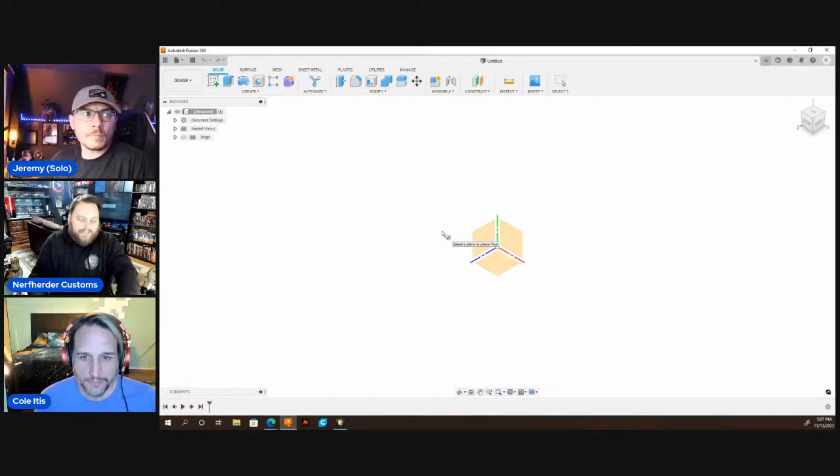This is what I've got done so far. Yeah, I decided I was going to do that too, so that way people can see the start from zero. Which plane do you grab? Do you jump on first? I missed it. I started grabbing a different one. Oh, this one, yours looks different. Yours looks totally different than mine.

Nice thing about these 2.0s too, there's a ton of room. Yeah dude, the thing with the 2.0s is that they're about as big as a 3-cell for the most part, right? I mean, you could essentially probably fit a 31 millimeter speaker in there, I would think. Yeah, you could. I got 1.29 inches for the diameter here that I feel comfortable working with.

That they can sound so good, and people would be like, 'Oh, what kind of speaker's in there?' And I'm like, 'Dude, just a fully enclosed 28. You're good to go, man.' That's it.

One thing I started to do that was messing me up, Jeremy, was I started forgetting to start with the battery first. Like I was saying with that other guy, go with the battery first, man. I think that's probably the number one thing you'll have a problem with is the battery. So if you don't design your battery or chassis to the right diameter of your hilt, when you go to clash, the battery can knock loose and it'll just reboot your board. It's super annoying and awful, plus it'll be rattling. So the number one most important thing when doing chassis is make sure your battery and everything hug the wall when it goes in.

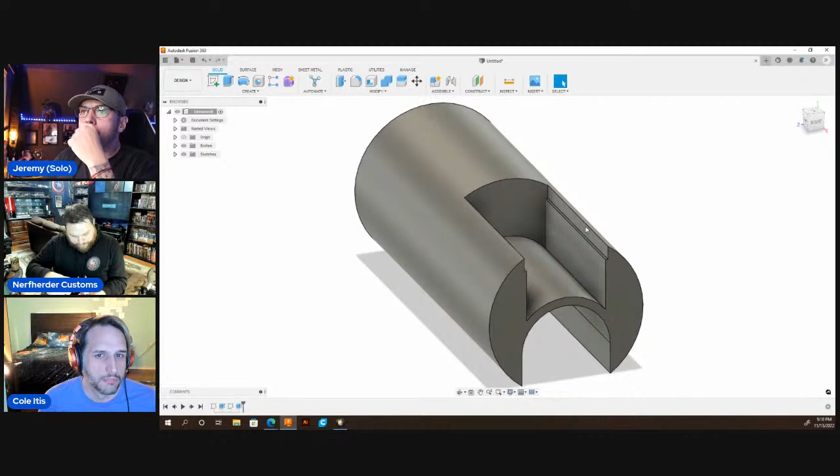Yeah, so I got 33.1 millimeters on the diameter. I don't know what that means, let me switch it to inches, bro. 1.3 inches. Does that sound about right to you? Yeah, that's what I got, 1.29. Okay, yeah, I tend to grab the calipers and pull them a little. I'm just going to go with 33 millimeters.

Hey, one thing I got real quick at doing is battery tabs, or like batteries.

Oh, I need to have that on. Oh.

Actually, might switch. I got you guys up on another monitor. I never use this one. Yeah, we're switching, I'm making you guys smaller. I can't see this. I'm using a trackpad, for a Mac.

Yeah, I don't think that's a good idea. Wait, what are you using? A trackpad instead of a mouse. Oh yeah, and it's the weird little way you have to finger it. Oh, awkward. A little frustrating, yeah, the mouse. I couldn't do it.

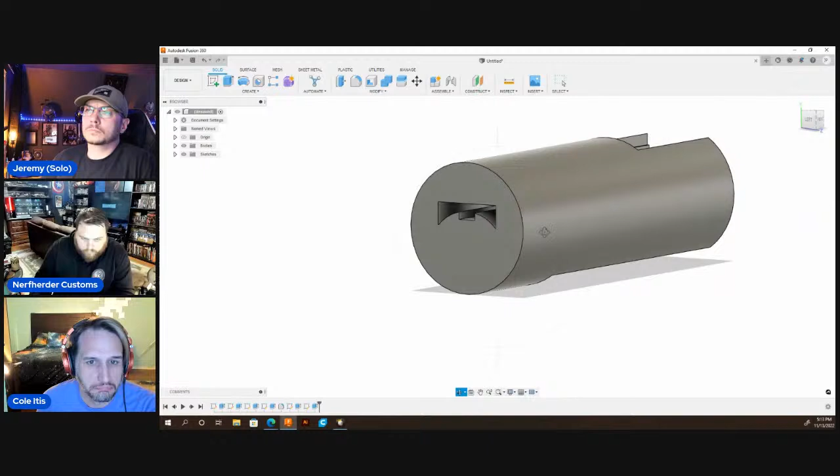One thing I like about this big of a chassis is that it gives me more room to play on the depth of my greebly inlays. If it's thick enough of a chassis, I can make those seat in further, so the dimensions of the greeblies I put on will be a lot more prominent. With smaller sabers with thinner inner diameters, it's really hard to do that greebly stuff because you'll end up protruding into the actual component areas. So whenever there's a thick bit of room to play with, that's where it's fun for me because I can really dive deep. You can dive in. Yeah, that's for sure.

I'll see some sabers and think, oh, the chassis would be really fun to play with that one. And then I'll look at other ones and be like, oh, that's a challenge, but can't make it work.

Cole, have you gotten used to the navigating of it? I think that was the hardest part for me, was finding out how to move stuff, you know what I mean? I ran into so many problems, I'm like, why can't I pull this piece?

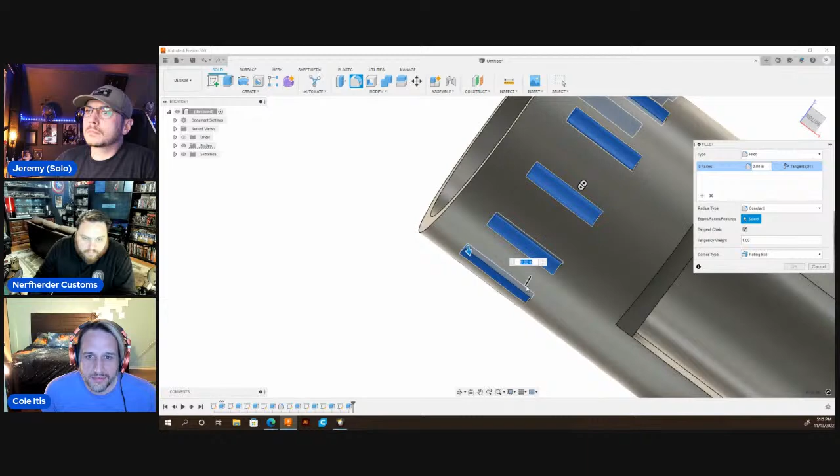You hear me, Cole? If you're busy, Cole, that's good, dude. Oh sorry, I missed you. I was saying, have you gotten used to navigating Fusion 360? That was kind of the hardest part for me, figuring out things like grabbing stuff and moving. For the most part, it's the rotating around I'm still not great at.

Okay, that's the drawing. So one thing I didn't realize till later on was I could use, if you have a mouse with a ball you roll, or if you press in, you can grab things and kind of rotate them.

So what I started to do was whenever I click certain things to extrude and whatnot, I'll click one item and hit Q for my extrude button. Then instead of shift-clicking to select everything, I'll click other items and it'll let you just hit one and select everything you want. Then when I push in the bar or the roll ball, you'll grab the whole item to move it on your own, and when you let go you'll be good. That's the one thing I used to lose a bunch of highlighted stuff trying to get out of orbit mode. It's just weird things you figure out by accident, really.

Jeremy's already got a whole chassis already designed. Cool.

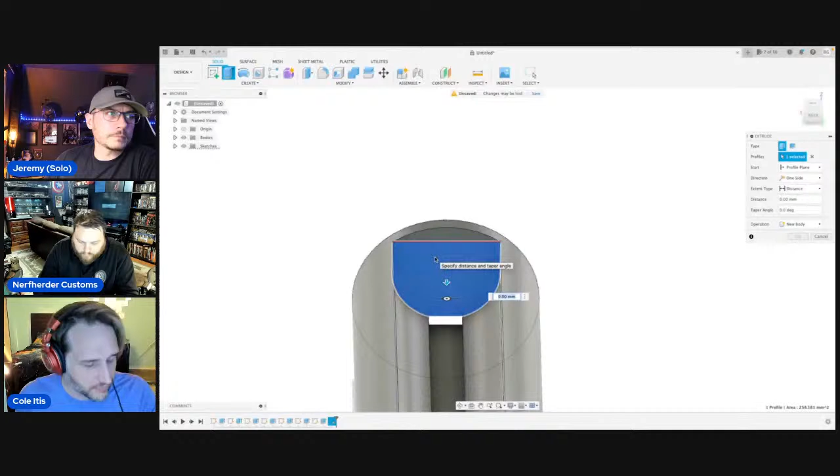Okay, let's see here. I'm still on the battery compartment of mine for anybody just chiming in. I finished up the diameter for the chassis and the battery and wire channel, and now I'm doing the solder and the speaker tabs. Got one.

All right, so there we go—there's my basic battery that'll fit in the 2.0. Then I'll do my soundboard right up top here, and then I'm going to go ahead and do the speaker right here.

Speaker, what's it, 33? I usually do like Jeremy does, where I do every part at 0.1 inch, giving myself a little room to work with before I get to that component. So yeah, I'd pull it out to right there and then start my speaker, same for probably down here. That just gives everything a really good bumper between components and the wall of the chassis or the next speaker or whatever.

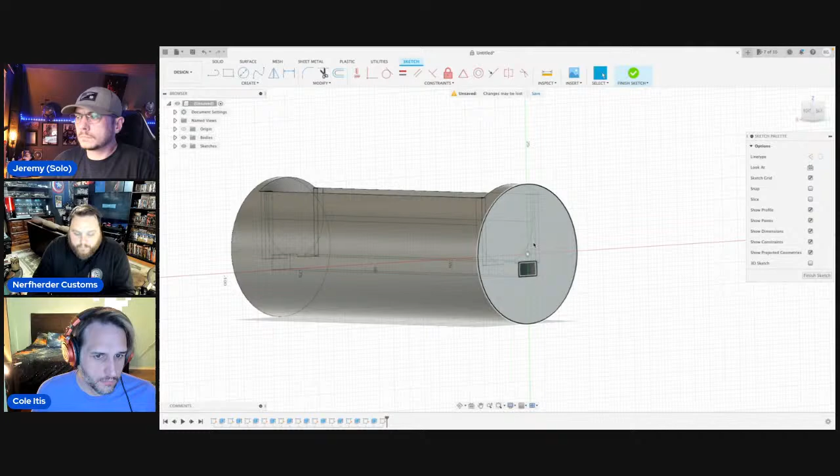Also, I do that mainly because whenever I change up a lot of stuff for greeblies or whatever I'm doing to the chassis, if I didn't create a new plane for this right here and I accidentally extruded it wrong, you could end up messing up everything behind it. So by creating this new plane, extruding it 0.1 inch, and starting my new area, that makes it so if I make any mistakes, I can come back to here. It's kind of like a checkpoint in a video game, really, when you look at it. But thanks for coming to my TED Talk.

We're done, I'm done, I'm done. So there we go, now I'm gonna go—this is one thing I started doing too. What's my diameter for... it's like 2340, I think, for a speaker.

Yeah, I started to just do this, man—I used to go kind of crazy with it. Let's say 2350. Negative at least 9. Enough room? Oh yeah, we can do more than that. Let's do negative 11, why not? Screw it. So then from there, that's the inside of the speaker, like with the side pieces—that's what dips in because I'm recessing this speaker completely. I've got more than enough room.

So now I'm going to do 28 for the speaker, and Q this guy to negative—was it 1.6, I think? Is that right? I always forget if it's close to that—no, 2, that's right, it's like 2.

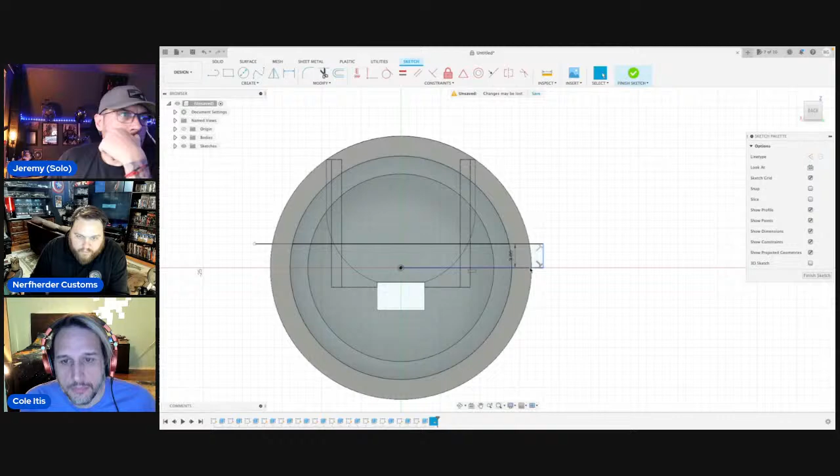This is another cool thing, I don't know if you noticed this, Cole. I want to go all the way across and make sure it all lines up well. If it doesn't, I'll usually go to this guy and it'll kind of draw out like, oh, you want to go there, and I go, yeah. So now it'll always lock me in. If I go here, it'll go, okay, you're locked to that distance now, so I can pull it and just let it hit all the way. See, it kind of locks in.

So every time I was trying to do that yesterday, it was making like a half circle. I was like, what the? What are you doing? I think you're holding the key down too much or something. There's a way where you can grab it - if you're grabbing it and holding onto it, it'll bend your angle, and that's not what I want at all. All right, so solder tabs are, let's just say -9.

Look at that, boom. So that's what I've been doing for my speakers, man, to be honest with you, because you're never gonna see it. So it's like just get it in and make sure it's functional. And then why not? Actually, you know what, I'm not gonna do that. I like to do the other one on top.

So yeah, that is basically it. Now I just need to get the soundboard.

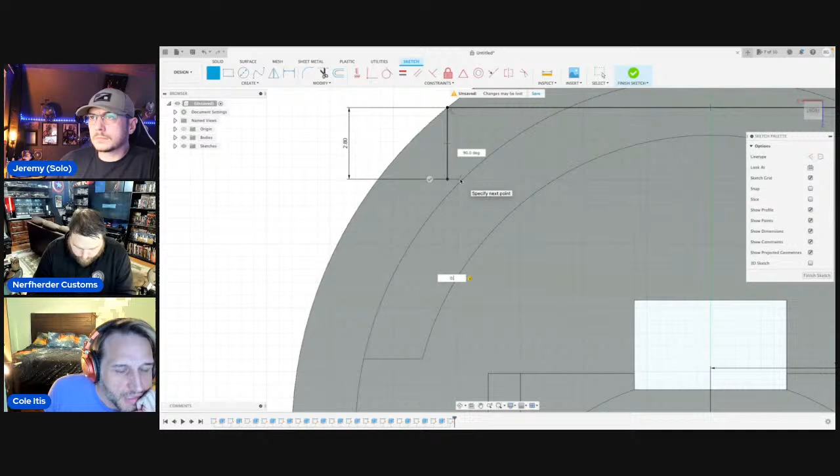That's right, you working on your chassis, Cole? Yeah, I'm trying to make a hole. Oh, right on. Center angle.

What the - just hell, let's see what that does. I'll hit the back button. Oh, that's pretty. Made a little hole in the back end. That's weird. That's what she said. Hmm, oh, it made like a cone. That's fun.

Okay, so I can just whirl around and do it again on the back side. Bam.

Any hole is the goal. Sir Peanut Butter, what does he say? Any hole is a goal. 80 holes a goal, oh my god. I love you, Sir Peanut Butter.

All right, so what I was saying, Cole, is I'm gonna extrude two different areas. All I'm gonna do is click that one area, then hit Q, and it brings me here, and I go, I also want that area. So I don't have to hold everything - it'll just, and you can keep going. I want that area too, but that's not what I want. So what I do is just hit that, what I'm getting to extrude, Q, and give me that also. So that's one thing I found out on accident, and I was like, oh, that's nice.

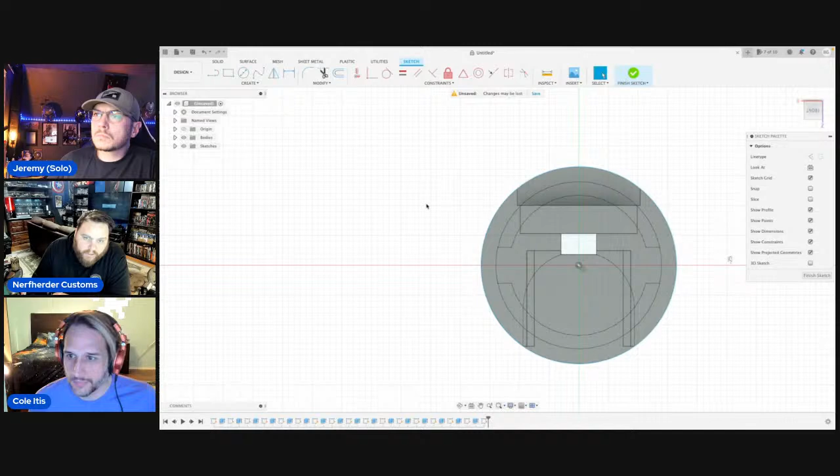Oh hey, this is also a tool that I use a lot. I don't know if anybody else really does, but I want to make an arc. I use this a lot for my greeblies and everything. So I'm gonna draw on here. I'm gonna hit L for line, come up here to create, go to arc, and then go to 3-point arc. This is one of my favorites.

This is my Kobe. Here we go. So let's just go, Kobe, my Kobe dude. I'm gonna go from right here. So I click there, and then I click there, and now I can create an arc wherever I want, just right here.

So that brings me to... I'm gonna go there, that's good enough. And then what I'm gonna do is hit that, Q, that, and then bring that guy out 0.1 inch. Boom, see that though? That 3-point arc thing, my Kobe key, so good.

I love it, so I shout Kobe every time I do it. Kobe! All right, there we go. There's the basic layout for mine. All I got to do now is...

This changes diameter into the Graflex core. So I think we're going to go to 26, 26.10, to make it snug maybe. Yeah, let's do that.

Circle, 10. Boom, baby.

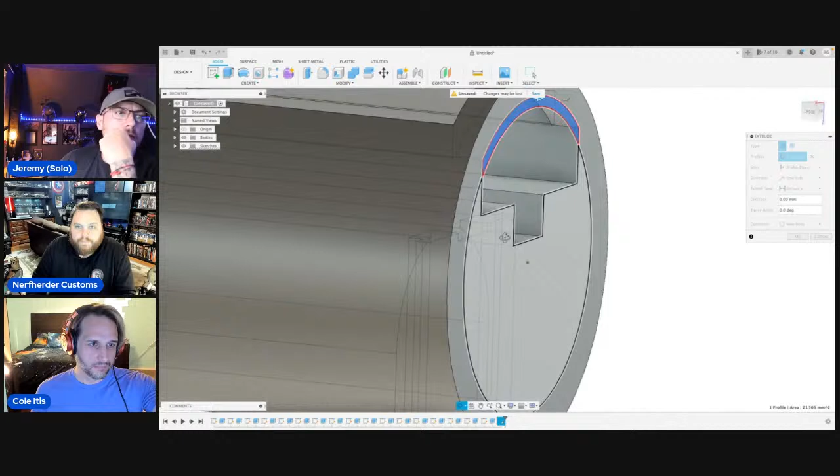Now I'm going to go ahead and build this guy out. Look at that, you see that? That's what's awesome about that Kobe tool. So now I can, otherwise I would have had a gap. So now I'm just going to go there. Boom, now that's solid for my wire channel.

And I can do the right size from that. So what did I say? 26.10. Yeah, boom. That's still probably not going to be enough. Oh well.

I see what I need to do. Okay, oh look, oh look.

What's up, this? What's up? Goofy ass bitches, who let him in dude? Who let him in, what are y'all doing? Making chassis? Making some chassis. Chassis, bro, hell yeah.

All right, there we go. Now we're talking, now we're cooking. And I think it goes in.

Speaker pods? No, this is to go into the core of the 2.0. Speakers down there.

Let's see, damn, how far in? How far in is that?

Oh, you on Facebook too? What's up man? Yeah, that's cool. You could do that on here.

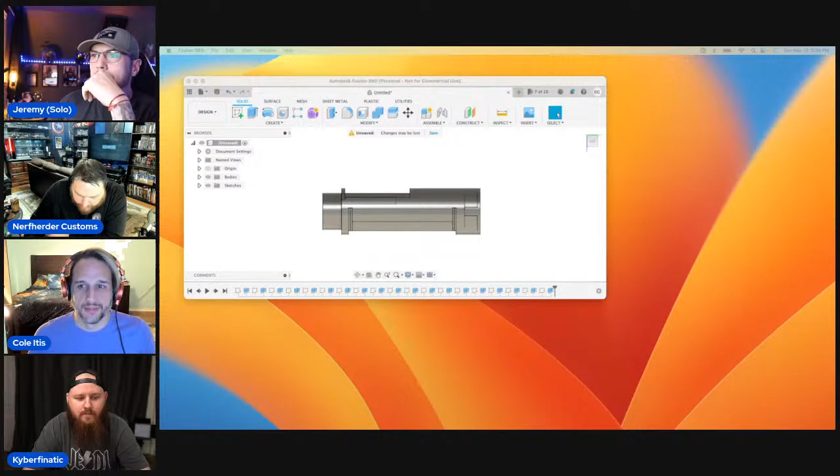Damn, I lost my... there we go, sorry. I'm gonna be working on my greeblies now, so I'm gonna be insetting all that shit and doing how I do it. Doing some simple shit, doing my simple shit.

Carter did, straight up, Carter, I showed that. Carter said, oh dude, cool, looks simple. I was like, dude, you know what man? He said, I like it, simple and effective, and I was like, simple, hours and hours of work dude, it's so long. It looks all right, it's a passive, it looks all right. I'm glad you like it, and that's your thing. You know, I gotta change my preferences, it's not my thing, but because you like it, I like that. I'm happy that you like it.

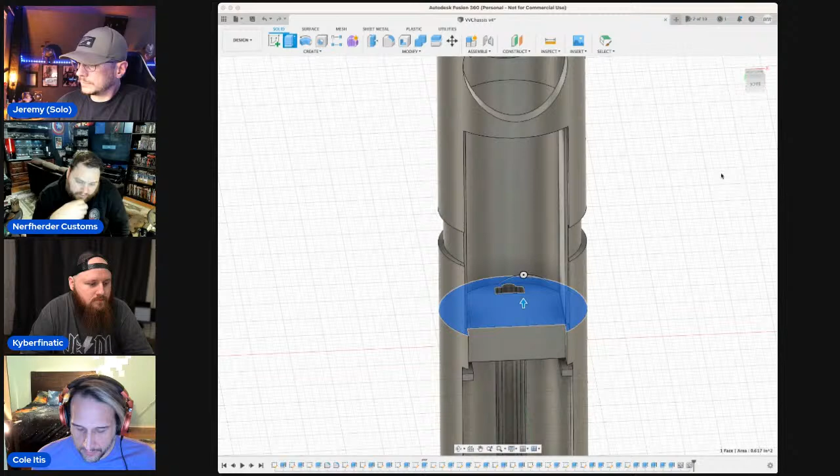So pull it and see what it does. Yeah, see, it's like if it goes red, that means it's cutting into it. So it's cutting as it goes down.

Hit enter, let me see what it does, because you might be able to just pull everything down from there. Yeah, now...

Can you merge? Is there like a split body? So how do you combine? I've never done anything like that. Get everything.

Dude, if I were you, you could just extrude everything down. So hey, hold on, do this. This is what I would do in this instance. Find out however far it is distance-wise that you're extruding down, and extrude everything above it down that same amount. So, like, let's say you need to move that one part down 0.2 millimeters, right? Then everything above it, move that down 0.2 millimeters also, so it matches what it goes down.

Oh no, this is actually a tricky thing. This is what I mean by, like, it's hard to - once you find out how to navigate, you're good, but it's definitely hard.

You can orbit to see the soundboard side of the gap, extrude the object down. Yeah, that's what I was thinking too. But it might just pull that part down.

See, if you click on underneath on the other one, rotate it so I can see the underside. Now zoom in and click on one of those surfaces, not that one, but the actual - this is so hard to explain.

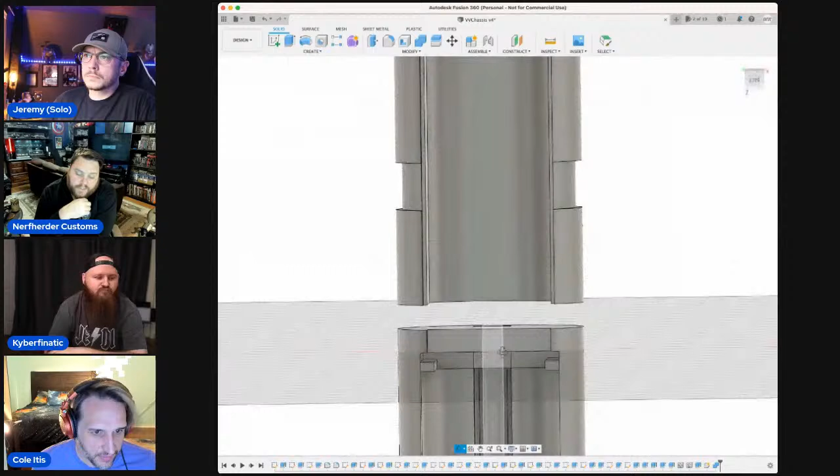Seems like there should just be some kind of function for this. I'm sure there is. The thing is it's two different planes now.

Personally, I would just delete and start over. Like just delete that top part and do it all over again. Might just be faster to do it that way. Yeah, because if I can do a battery compartment in like a couple minutes, I'd rather just do that and make sure it's good.

But I mean, there should be a button. I just don't know it, Cole. I've never had to do that before. You can do it in Mesh Mixer if you exported it out to a slicer program, but you don't want to do that because you're still probably building on it.

Oh wait. Whoa. Yeah, Brian, that's what I think he's trying to do. He made one part a little too long. He did exactly what Cole did. Yeah, see, that's what I'm saying.

I would just - it looks like I would do the battery compartment because that's probably a little quicker, right? I don't know, it's up to you, Cole. It's your Z.

Oh, you did? That was too far. Move, copy - but I don't remember what I took out now because I'm an idiot. No, dude, you're doing something weird. 1, 3. Boom, now hit enter.

Okay, there you go, boom. Make sure it's all good. Click on the lines to see your measurements. Make sure the board and everything is the right length, you know what I mean? It looks right though. You want to go to the combine tool up top too and make that all one object. Okay.

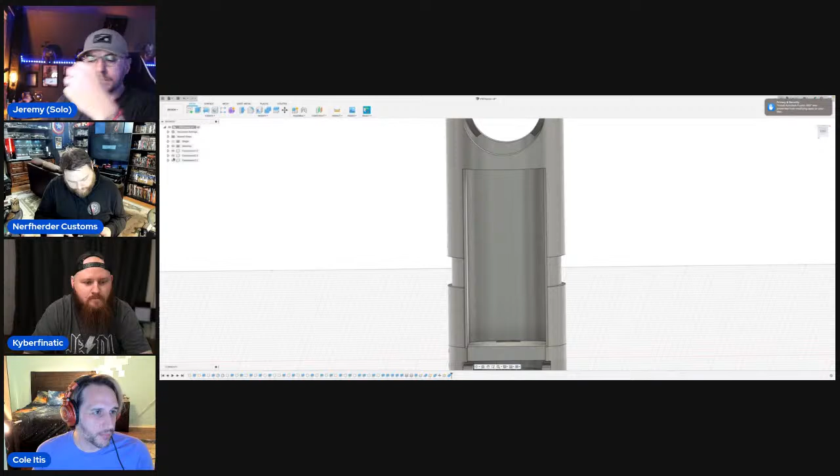I'm curious what that'll do when I save it, if it puts us on the STL. Let me see if I can do it—can you put us on the bottom? I will try, or you could just export it and see what it looks like as an STL, see if it worked. Yeah, that's a good point.

Because if it's 3 different pieces in here, you might run into problems with designs later on. That's the thing that sucks—sometimes you can't push through here because there's a plane now, and it's just like, how about that. Well, then you don't see any of this.

I have a couple to spare too. It's always a good feeling whenever you design your whole length of your chassis and then make sure it'll fit in the handle and you've got extra room to play with.

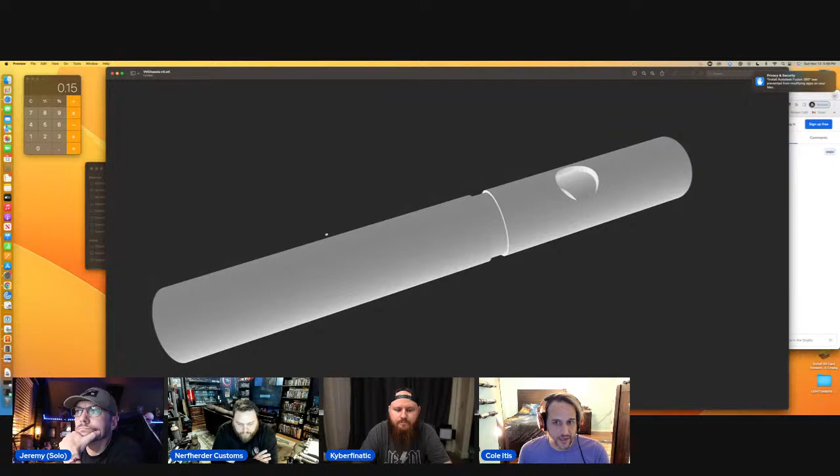Oh, there was one other thing I wanted to ask y'all. Simple and effective, dude. When I was printing it, it printed out okay, the only thing was I went a little too deep. That's what she said.

You guys are silly. I went a little too deep on the battery contacts. It's fine, it printed out fine, but I think long term if I'm going to use this again, I wouldn't want to. Right, I started to make my cradle and contact area—that's something I really look to make sure I have enough space for.

Could I fillet it? You could, but could you also just fillet it? That's what I did. Are you talking about grabbing underneath it and pulling it up a little? Yeah, like this little dude, that's where I was running into problems. Zoom in, let me see. Oh no—enhance, enhance.

So you want that curved? Yeah, I want to kind of curve it. Just hit the fillet tool. Now hit the other one, go to the matching side.

You're blowing my mind. Hold on, just extrude. When you do it like that, you'll see, there you go.

Grab the other one. Do I need to hit shift? No, you highlight it, then hit fillet, or you can even hit fillet first and then highlight it. Now go and click it. Did you get it? Yeah, now you got both of them, and when you do them, they'll both be the same.

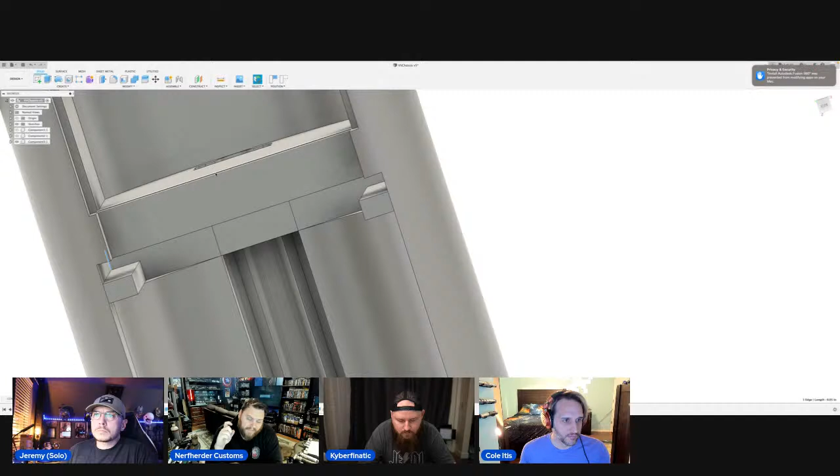So when I print it, on the back side, I can't show you right now, but there's like this tiny little hole. Turn it and scroll out a little so I can see your model. Right, he cut too deep.

Oh yeah, I know what you're saying, on the corners of your battery tab. Yeah, like right here, I would just like to curve it just a hair.

If I have a situation like that, I'll fillet at 0.075 each corner. Oh okay, yeah, then I guess highlight it and do 0.075, see if that works.

But yeah, I get what you're saying now, Cole. I'm sorry. No, you're fine. The Vader's Vault chassis are thinner, so yeah, you're gonna...

You could try. Oh yeah, I don't know, they're very thin. That's the battle you got to do, is to see how close you can get without extruding. So that looks perfect. If you're doing some of them for speakers in an oval hilt, and you're trying to put the speaker in an unorthodox way, because of that, you'll run into the same issue.

Kind of sucks, now y'all get to watch me. That's what I was saying though. You should be able to see it. How do you have your... oh, you do it like that.

All right, I know Jeremy always makes fun of this, but I do in display settings, visual style, I do shaded with hidden edges. What that does is it allows you to see through your chassis on the other side, basically like the wire workings of it, so you can see down at the bottom where you can grab things.

Look, pan and zoom, there's a TV looking icon, display setting. Hit that, up the visual style, and I do shaded with hidden edges.

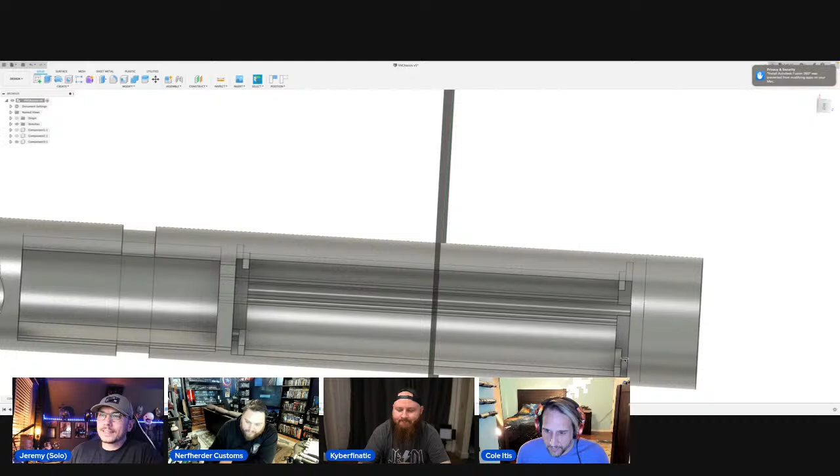Let me do these one at a time. I don't know - I've pretty much hit all my unicorns, and there's not really many hilts left for me.

I'd like a chance to install a Black Mamba someday. Oh, you know what, I was wrong - the Graflex Metal Master, that's one I would love to do. That'd probably be like my swan song with the vintage Graflex. Yes, that would seriously probably be my swan song - the last one I'll ever do, if I get around to it.

Where you at, Cole? Filleting, feel it, feel it - open your presents. I think that's it, that's the only stuff that was bugging me.

That needed to be a little shorter. TBD on these holes, how they're going to work out. Is that for the 16 millimeter switches? Yeah, and then I did the back one a little smaller just for a dome tactile.

Is the chassis visible when you open it? I mean, the bottom probably will be - yeah, probably it'll go into about right here.

That's the thing that sucks, I was talking about that earlier. Doing greeblies on that chassis, like designs and stuff, will be hard because of how thin it's going to have to be - how small the diameter is. This one, I just want to get one that works.

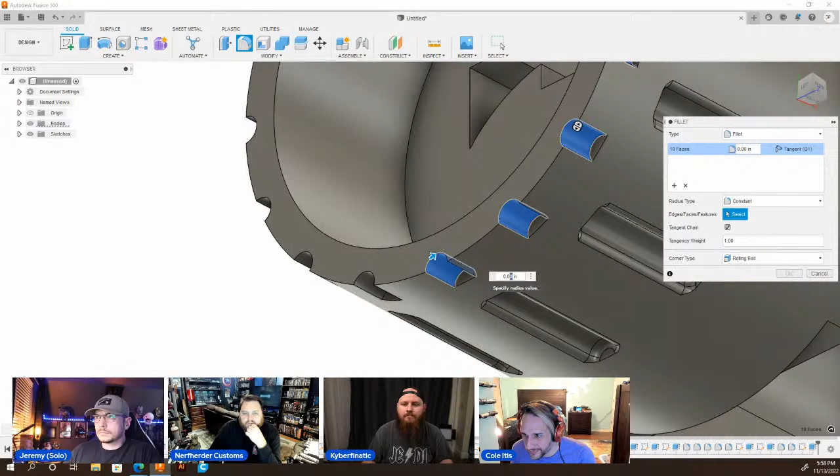That's back on you, dude. Let's see that simple and effective going. Is it back on me? No, it's back on Jeremy. It's Jeremy's turn, I took a little break - actually I will take a break. When it comes back to me, I'll show you guys how I do my recessing chassis greebly bullshit. So I'm gonna drink.

Just as a bitch - no, excuse me. All right, I got a little further.

Oh, that looks nice. Thanks. Here's my OLED screen. That's a little boy, look at that. What is that for, is that the Yoda? This will be my SK - so basically a Graflex 2.0.

Is it small because of the crystal chamber? Oh, it's not small, I don't know, it just kind of looks that way. This is for an OLED screen right here, so it's pretty decent size - about an inch and a half. Okay.

Is it like the fully removable type thing? Yeah, fillet removable - fillet, fillet removable.

Don't sleep, just a bitch - excuse me. Okay.

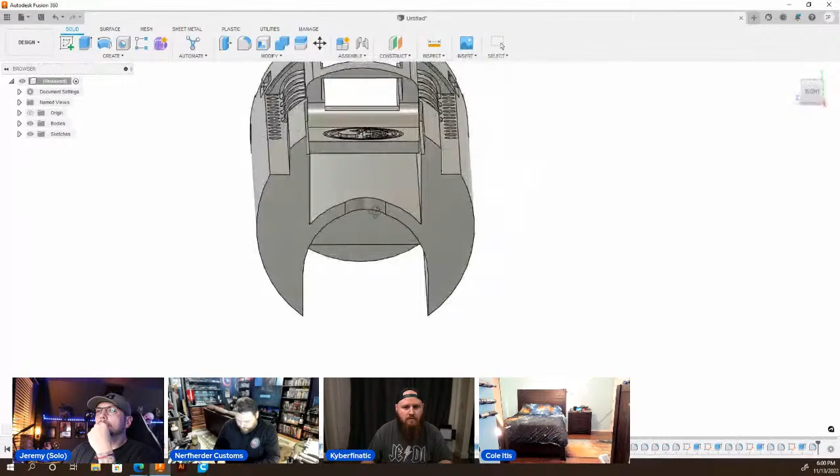I don't know if I want to put LEDs in this chassis, man, or just put some cool greeblies on it. I think I'll probably skip the LEDs.

Both, Jeff, both. All right, let's see - just got a vintage cup. All right, but not this one, I don't want to, I think not this guy. I'll do some 35s, they're a little bit more robust.

Where's Albert? That bitch.

Dude, I love what you're doing with your chassis, Jeremy. Thanks, heavily inspired by you, man. Just trying to keep up. Nah, not at all, dude. But I love how you're doing your board cradle, it's so cool looking. Right on, and that looks dope.

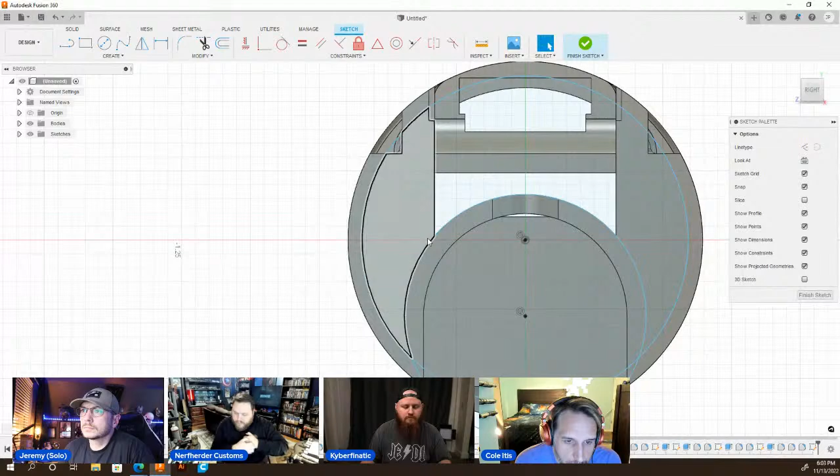Jesse, Black Panther was good. Need to go see it. Oh yeah, that's fucking awesome. Yeah, I really want to see it, I don't know when though. I'd say probably the second best Phase 4, behind Spider-Man. I'd say Spider-Man's still the best Phase 4, mainly nostalgia, but it was good too. But this one was really good, I think I like this one more than Thor. I like Thor a lot too, Thor wasn't as bad as a lot of people made it out to be. Yeah, no, it's good, Thor's definitely my number 3 out of the movies, of Phase 4.

There's Zach, huh? Zach up in there? What's up, Zach? I think Zach's chat said Black Panther was the best Phase 4, honestly. Yeah, I still like Spider-Man more, but it was very good. See, Black Panther's a very sad movie. Oh yeah, I mean, I still didn't cry, but Spider-Man made me cry.

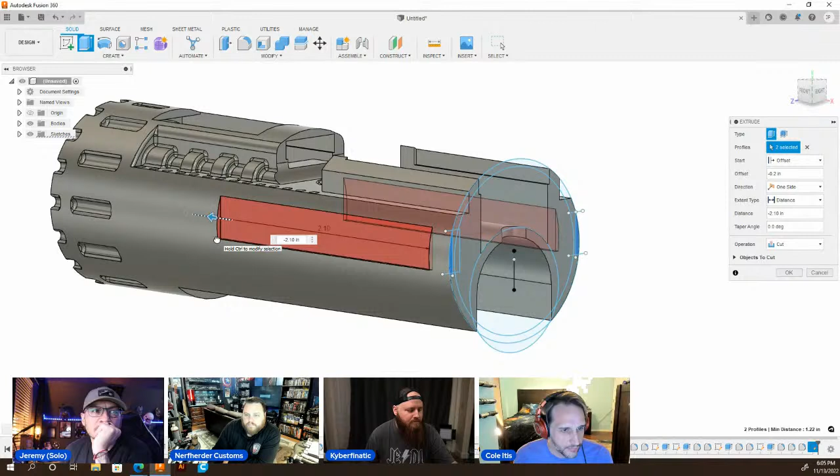Oh man. Excellent. Hmm.

Bet Jesse hits up those hot singles in his area. Don't lie, dude. Sometimes you just gotta let them know you're down the street. Hit them up and say, 'Excuse me, ma'am, can I please have a hug?' You know, that type of thing.

God, Jesse, that was so fucking funny for me. Hey, Jesse said, 'Oh, you messed up, dude, you should have never said that.' He was just like, 'I'm going to bed.' Jesse looked right at me, he was like, 'Here's the new thing to pick on Carter.' I love that boy, god, I love that boy.

Bro, when you sent that medieval one, oh dude, oh my god, I was crying. I was in the taco shop literally crying. That's why he shouldn't have messed, like I was laughing. He shouldn't have teased me with the Taco San Miguel shit, okay? That's why I was like, oh, this dude wants some, I'll give him some.

Yeah, when you did the fair like thing, I had to read it like a couple times. I'm glad you got a kick out of that. Good, that was good. He was like, I don't think he was very amused, he was just sitting there like, all right. And I was like, dude, you started this war as soon as you bragged about your Taco San Miguel too. Not cool, bro.

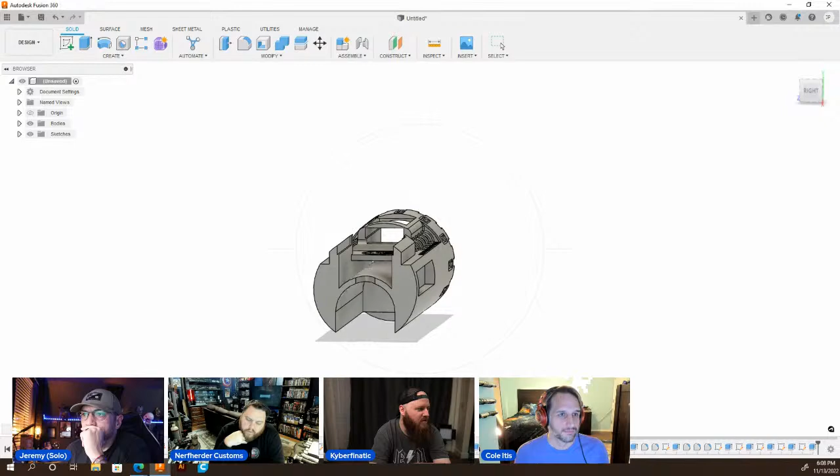Haven't seen any of Phase 4. Wow. Any of Phase 4? That's like a couple years worth of shit, right? I don't know, like 2 or 3 at the most. What was first Phase 4? Was it Homegirl? Black Widow, I think it might have been. Or was it Far From Home? Or not Far From Home. Yeah, Far From Home, maybe it was. No, what was the first movie? That was the first movie after Endgame, right? Black Widow was Phase 4, wasn't it? Yeah, because it wasn't Phase 3. I think it was Black Widow because it was supposed to be, they got pushed back like a year, didn't it? Yeah, but what came out first? Wasn't it Black Widow, then Shang-Chi, then Eternals, then Spider-Man No Way Home? Did any of the Disney Plus shows... Oh, it was WandaVision, okay, right? That was the first thing in Phase 4, WandaVision. Okay, yeah, that was tight.

That show had me all kinds of upset for a while because I thought it was only like 6 episodes, and I was like, get to the point right now, or I'm about to get mad. It was like 20 minutes every week. I was starting to hate the show, then I realized I had like 4 more episodes. Okay, alright, yeah man, it took a minute to take off, and we weren't even used to that format. Oh, Spider-Man was phase 3.

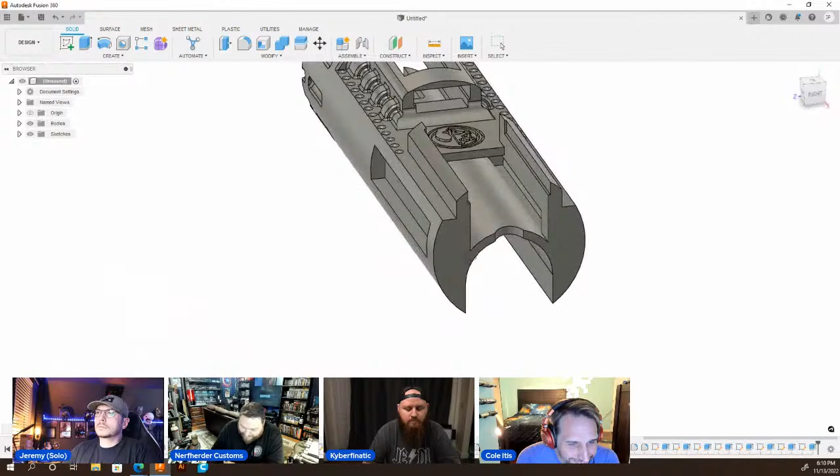Enhance. Oh, I'm going to swap it over to Benji for a while. Okay. Let me hit my presenter button. Alright, you should be good. Alright. Oop. Oop, what happened here? Wait. Shit. No, there we go, damn it. Oop. It's alright, dude. Walking away now.

Let's see if I can fit this boot.

I tried to start doing something different on the speaker side, so I'm not straight ripping off Jeremy's chassis, and I've kind of come to like doing these guys at the end.

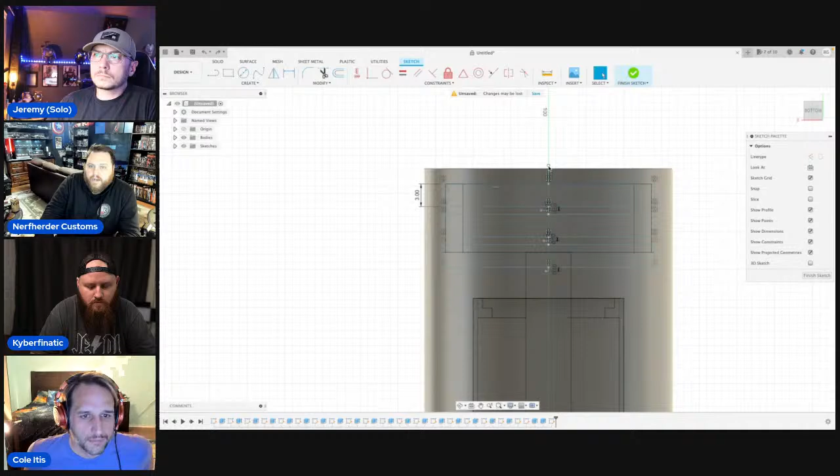So what I do is I go here and use my middle line to make sure everything's even, and then I'll mirror a lot of stuff so everything is super even. Then hit bodies, and I can get rid of all of that. Then I can hit Q and extrude for all 3 of these. Hit bodies again to bring it back, and then I always kind of rotate it a little bit. Then over here, I hit object, extrude from object, and I'm probably only going in 1. Boom, done. So now I have that guy right there on the speaker end.

And then Cole, when I was saying to use, see how you can see all of my things that I've created. One of the main reasons I use this is so I can just turn it, and then there it is right there. I don't have to do all those measurements anymore.

Now I just hit L for line, click on a plane that it needs to be on, and do the same process. You can pretty much get it exact, you know what I mean? Like I'll hit right here, and then I know this is 3, so I'll just hit 3, and then boom. And then I want to say this was however much across, but that's it right there. And now 3, boom.

And then the great part about that is now that you have those lines drawn, you can just go, alright, there. You know what I'm saying? And then there. And then I'll go down 3, which might actually be, it looks like it's off a little bit, but that's just because it's showing through.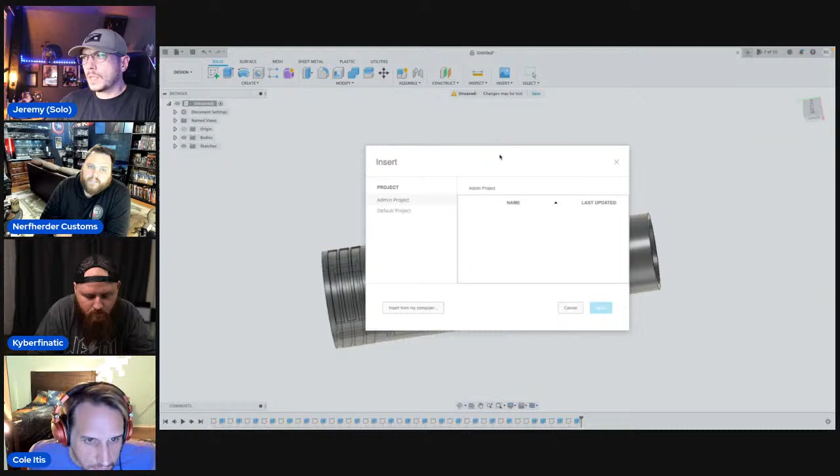I'm going to insert my SVG because I sometimes forget these. I only insert really one SVG, and it is the Death Star panels. I like to put the Death Star panels on my SD, whatever it's called. Those look really good. It was like the first time I ever put any kind of image on anything, and I was like, done, man. I don't want to play with that any other way. I've been doing it the same every time.

Is the SVG like a vector, or is it a? Yeah, I think so, right? I just put my images in a converter, a PNG or whatever to SVG converter, and sometimes they work, sometimes they don't. But this one always works.

So this one's not on a plane, it's actually on the surface because I'm able to click that. And then boom, I just go 1 there, hit Q, and then boom, boom, boom, boom. Since it's not wild, I usually don't go too deep on these because you'll get crazy support structure bullshit you don't need. So just 0.50, and there we go. That's for my cradle there.

Double A Barry, so you did those Death Star panels by hand. Dude, I used to do them in a way harder way. And then I accidentally did it like that, and I was like, oh, that's 100 times easier. So you can do them a bunch of different ways. I honestly don't use that many SVGs unless I get a crazy idea, and I'm like, all right, I want to do something.

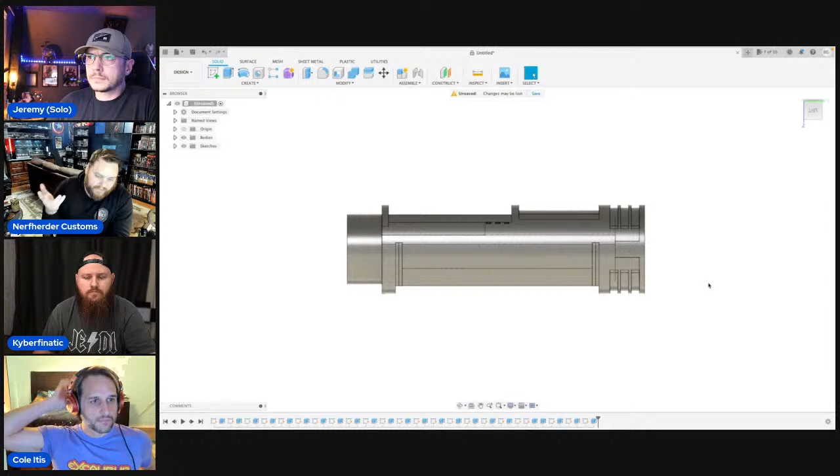And again, the picture has to translate well. Most SVGs that you create don't handle, like if I had a logo with a lot of little details, unless I was printing in resin or something, it'd have to be pretty big to get all the details. But if you did thick line art, you could bring it in. Yeah, for sure.

All right, now what I do is, this is the part that's the most time consuming in any chassis that I do, and it's usually just guessing. So that's where it stops, obviously. But with this one, sometimes I have a theme, but I'm just kind of going with it. I'm going to go ahead and do this.

Oh, you know what? Actually, I'm going to spend a lot of time on this. I know it right now.

So what I've been doing is, like on these guys, see how they zigzag a lot on these chassis that I've been doing? The hardest part about that is I have to create that inlay like 3 times. So it's worth it in the end. I might not do it.

But basically what I do is I go 12, then I hit tab, and then I find my 45-degree angle or whatever, which is kind of annoying because it's never always right on. But I'll hit that, and then I'll go from here, and I'll go like 6. Let's go 3. 3, and then I'll go another 12. Boom, then I'll go 3. Boom, yeah, and then I'll go to 12. And you just do this all around.

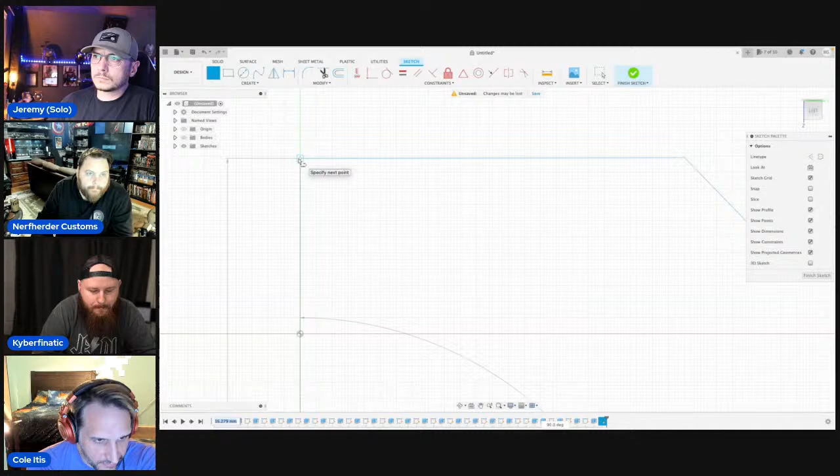There we go, that was weird. So now I've highlighted that... go away. Object.

This guy. Since this is a thicker chassis like we were talking about earlier, I can go in like this. Boom. That gives me a really cool, deep-seated place to do greeblies. Actually, I'm kind of glad I went with that. It's a little different, a little offset than what I usually do. But then I just go over here, and now I can do it a lot quicker.

Because I can essentially match it. For people who are real OCD about it being extremely identical, it's not going to look identical because it's seeing through an object. There were plenty of times where I was like, hold on, I'm way off. But you're not, it's just finding through it. Plus, it's not going to be super matching anyways when you really look at it because these chassis are smaller than you think. As long as you use the same lineup, like how I'm using 3 and 12 and 3 and 12, then you'll be fine.

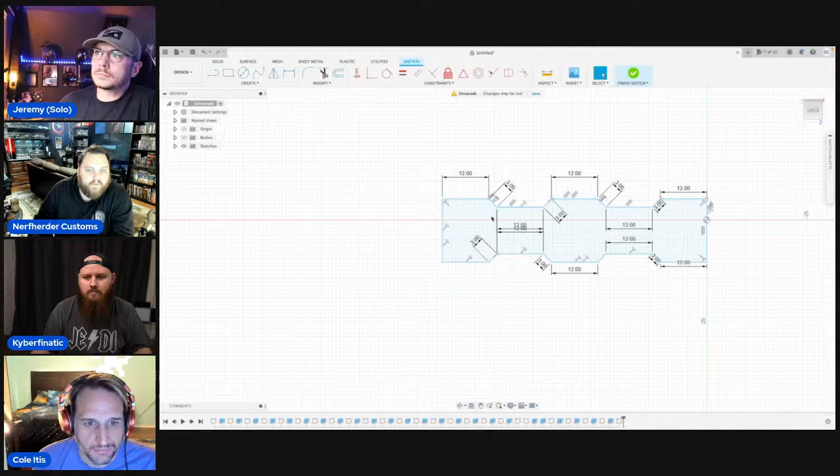If I would seriously have to say, building the chassis is simple - it's just designing something new every time, you know what I mean? For a while I was doing the same thing over and over again, and then I started to be like, man, I need to try something different, spice it up. That's where I spend most of the time, looking at the design, trying some things, and I'll spend like 20-30 minutes on a certain design. Sometimes I'm like, scrap all that, I hate it. You just have to experiment.

Yeah, I'm glad we could unmess up the mistake I made. That was fun. Normally I would just spam the back button 97 times. Well, I would have just cut and redone the whole top part, then figured out which part I could redo quickest and just gone for that. But you'd be fine. So from here, I still have these areas, so I'll probably just draw on here.

This is what I was saying earlier too, kind of with your problem - this guy right here, see this line right here where my soundboard holds. I got to make sure I don't extrude close enough to that, but I've got plenty to work with. I could probably push that in at least 1 or 2. Since this is just going to be a piping greebly setup, let's go 5.

Let's go here. Actually, I don't think it'll show up, but these are those little holes I was talking about, just teeny tiny. Oh yeah, you've been fine. I mean, but I feel you - it's definitely one of those things where I just don't like the idea, like eventually that's going to crack.

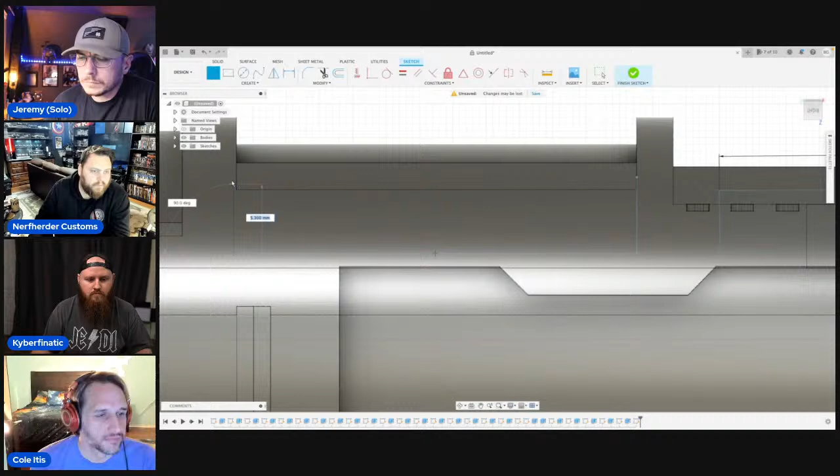You're basically saying create an SVG of greeblies. Yeah, you could, but it changes, you know what I mean? Because not every chassis is going to be the same size, same length, same everything. So I could do that, but this is part of the fun for me anyways, is to just go ahead and go, okay, how am I going to do this one? I'm going to do it completely different and whatever. But you could, just like I put the Death Star panels on, you could do - oh, that's off, that's off for sure.

You could do your own SVG that you want to just kind of slap on there every time. But I mean, it's really whatever works for you, dude. Yeah, I like that, okay.

Whoop. Man, see, there's a problem.

Hey, PVC chassis is cool too, Abraham. What's up? Abraham says my PVC chassis. LOL. Dude, PVC chassis are how I first did it back in the day. I still have a PVC chassis somewhere around here.

All right, let's try -1. Yeah, that looks good. Yeah, we're making some progress on this guy. So on this side, I would basically do something here, and then I'll probably just leave that because there's not enough room. But that'll be all right. That looks cool.

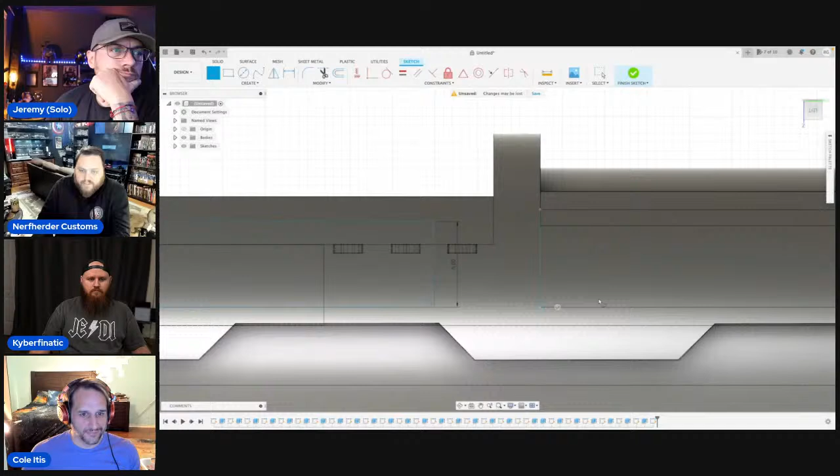Basically, the more time and detail you put in it, the cooler it is, obviously, just like anything else. But I also get to a point usually where I just get tired, and I'm like, that'll do. Because I can design these all day long. You get lost in this easy, and you try things. Honestly, some of the chassis that I've done that are my favorite, that are the most detailed, are the ones that I took many breaks in. I did it over the span of like a week, you know what I mean? Just like, all right, I'll come back to this one later. But you can spend all day doing this. I mean, because again, like I said, I haven't even got to the piping or the inside or all that stuff. I'm literally just making canvases to draw in right now.

There we go. So I'm going to put stuff in here, vents and pipes and greeblies all around, because the chassis is basically built like it could work right now, but I want to make it look like in-universe functional mechanical pieces are all over the place in there.

So I think what I'm going to end up doing with this guy is I'm going to do one more here. Oh, also forgot, if you can use areas to where you can get a good mirror, that's half the work, you know.

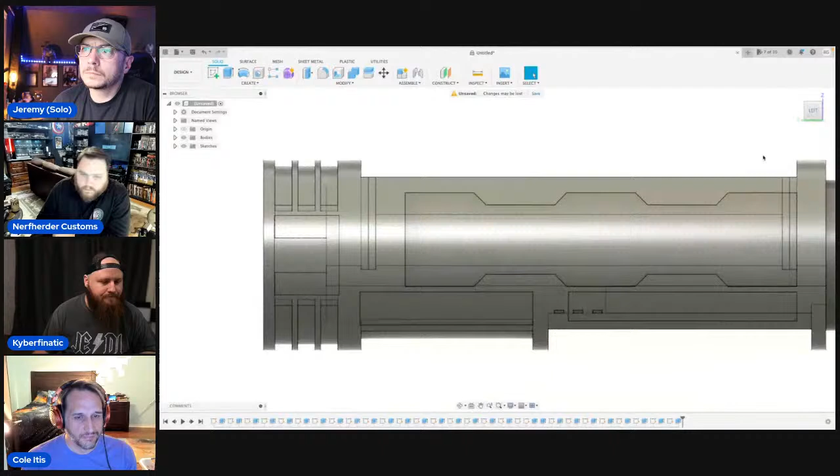I think 1, isn't that right? Yeah, we'll do 1 for this guy. Do that one there, and then I got space right here. Oh, and then I like doing these vents on each one. That's another reason why I started doing this shape, because it gives me this cool, I don't know, it felt like some kind of Fallen Order thing, which is what I did on my Fallen Order chassis. I tried to get cues from the designs from a lot of shit in that game.

And then I guess maybe I'm gonna do 3 on this side. So for this dude, I'm gonna do... let's do 6. 5. 5. 5. Let's go 10. Nope.

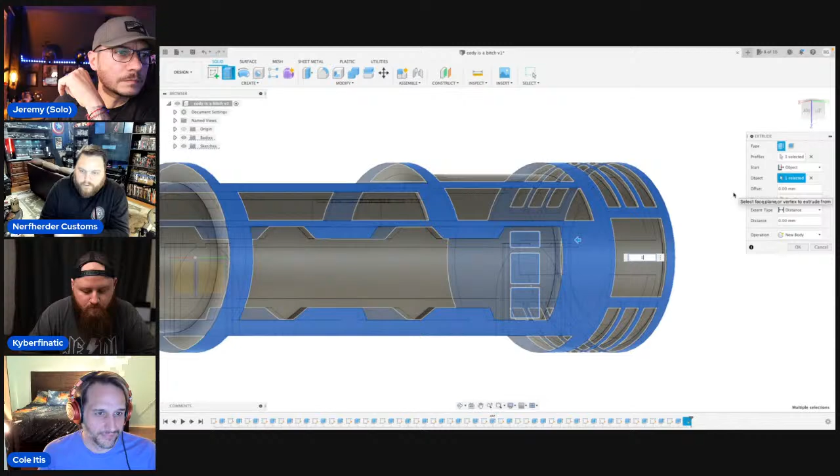Let's go in. Boom, bitch. Yeah, that looks cool, I like that. And then the same thing over here. I'm just going to...

I like greeblies. I like my greeblies to be recessed. Recess them deep now. Recess them deep, I do, man. I realized for a long time I was shying away from recessing my space in there.

Oh, that's off. Okay. That's why, because I'm an idiot. Yeah, but because I used to think that it was like, oh man, it's going to take so much support material. I started turning off almost all my support material for greeblies.

Like, you'll see if you do something like, if you do a chassis design like this, where it's a lot of pieces that are everywhere, the slicer will be like, you need support for everything. And I used to be like, oh, I don't want to support and pull it, it'd be ugly.

This last chassis I did, I pulled it. I put blockers on everything except for like the bottom and the battery terminals, or the tabs, the cradle, battery cradle, board cradle. And I was just like, just support those. Everything else, screw it. Let's see.

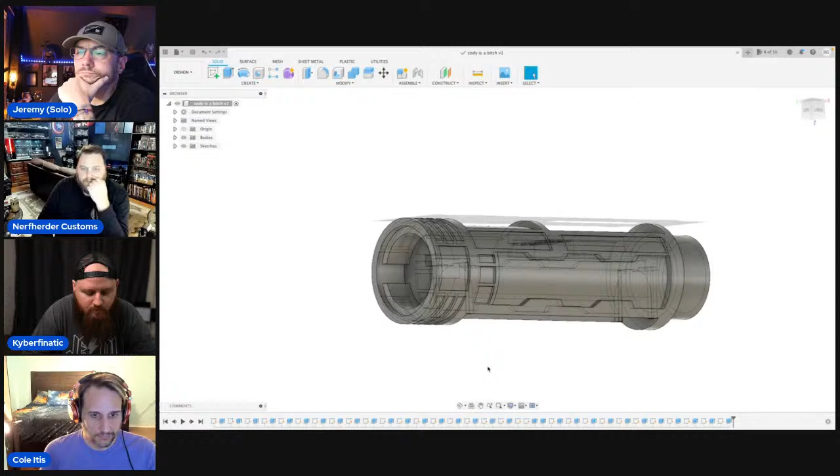So now what I'll do is I would just go in and start my round of inlaying everything and extruding it out. So the reason why I push everything in is so that I can draw on these planes and pull stuff out. That way everything has dimensions and details and stuff like that. It just gives it a lot more.

But that's what I would do. I would go and do, like I just did, every side here. I'll do something real quick before I give it away. This is one thing I started doing just to fill up spots.

I'm going to do a circle right at the middle line, and I'll do 1.5. Hit that. Now what I want to do is hit S for the search, and then do pattern. I'm going to do a circular pattern just like Jeremy would do on the speaker. I'm going to hit that, and then this is my center point.

Oh, hold on. Hit this guy, and then switch to the center point. That's my center point. And now what I'm going to do is say, let's try 32. Actually, that's right on the money. I could do more, I will do more. 36.

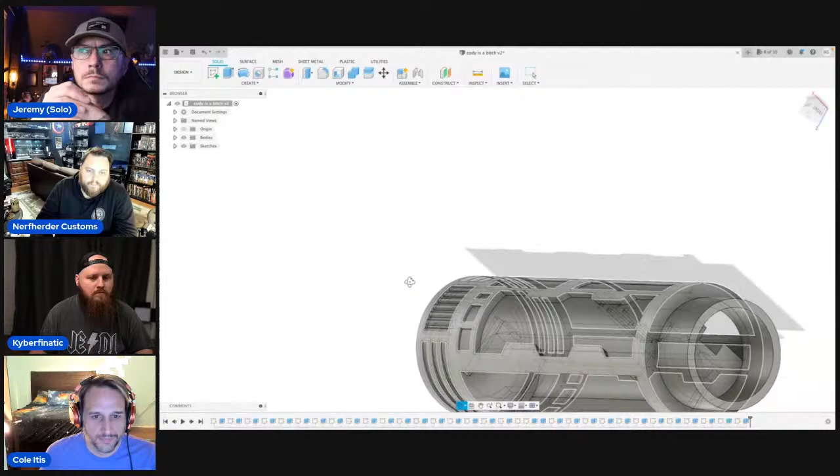And then another thing I've done a lot, I'm not going to do it, but if you had enough room, you could go here and hit circle, and then it pulls all of this up so you can see them. And that's the circle point. You could pull it out if you had room. This is just an example real quick. Then whenever you turn it and go here...

Now it looks like it covers that pipe. It's like conduit piping or what? Not conduit, like... see what I'm saying? It gives it that little detail. Actually, I'm going to do that to every one of them. That looks dope.

Okay, the only thing that sucks is this is where it separates the boys from the men. You have to do it one at a time, each time, because you can't do them all in one and pull them all. It will only line up on like one, or maybe. Let's see. Some it won't. Let's see if it does it.

Let's just do 1.7. No, is it more than that? I didn't see the first measurement because I didn't think I'd keep it. Alright, maybe I could do it all. Some of them won't let you though, you know what I mean? Like some of them, it's like, no sorry, this isn't the plane that you're on anymore, or something.

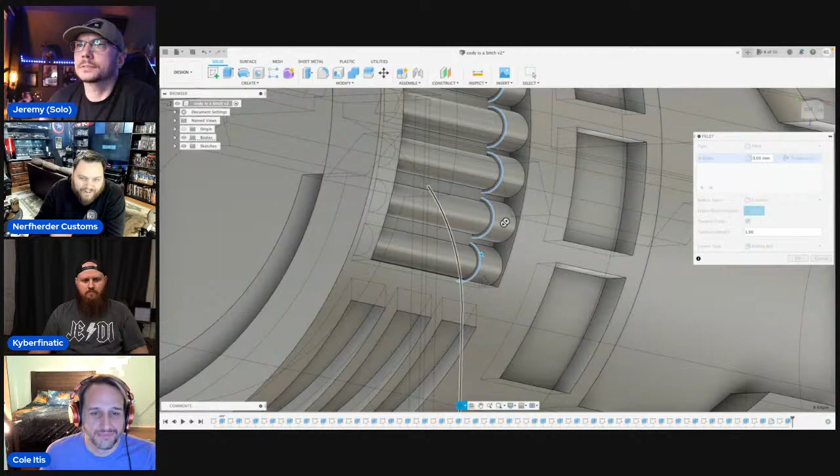Okay, so here's what I was saying earlier, Cole, and Jeremy too, I think Jeremy knows now, but click that one line, fillet, and then just everything you click adds to the fillet. I did that after you told me about it. I was like, man, this is so much easier than what I was doing. How many times were you holding down that shift key trying to grab a bunch of stuff without losing it? Yeah, dude, it was an accident. Like I straight up clicked and was just moving too fast or something, and then I don't know.

I wonder if I can move that one back a little bit. Let's go there. Can I move this guy back some? See, it won't let me redo it. That kind of sucks.

That's one thing I don't really understand yet is how to undo a fillet, because it won't let me do this one anymore. Oh, I love that. Lame. I'll just have to fix it by going back and doing them all over again.

Magic, what saber is this for? Are you talking about the chassis I'm doing, Kyle? This is for a Graflex 2.0. Could modify it. I will be doing a chassis for my Star Killer, which will be a normal 2.0, but it'll be with a Proffie. It's for CFX for right now.

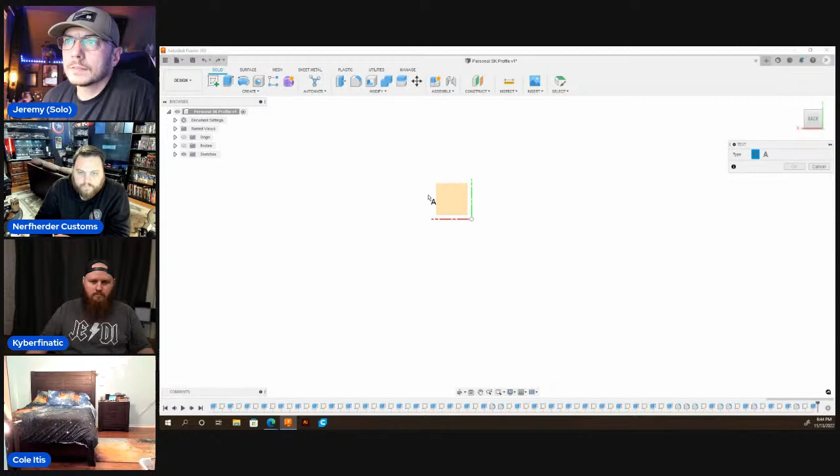I'm a greebly noob. What are you talking about, dude? You taught me how to do this stuff. You ain't no noob.

Yeah, that was probably the hardest thing, making it your own style. It's hard to do because there's so many people doing so many different chassis. You don't want to copy anyone, but it's all kind of the same thing. I can easily look at a chassis and tell it's Jeremy's, or Albert's, or Tim's, I can tell Tim's chassis as soon as I look at it.

Dude, that looks awesome. Thanks. I love the gears.

Oh nice, you did an extra, that's cool, I see what you're doing there. LED strips will go in here, one on each side. I'm gonna try your piping trick over here, but I didn't want both sides to be the same, so I made a few piping things in here. You can see the pipes on the other side, the exact same way I do it.

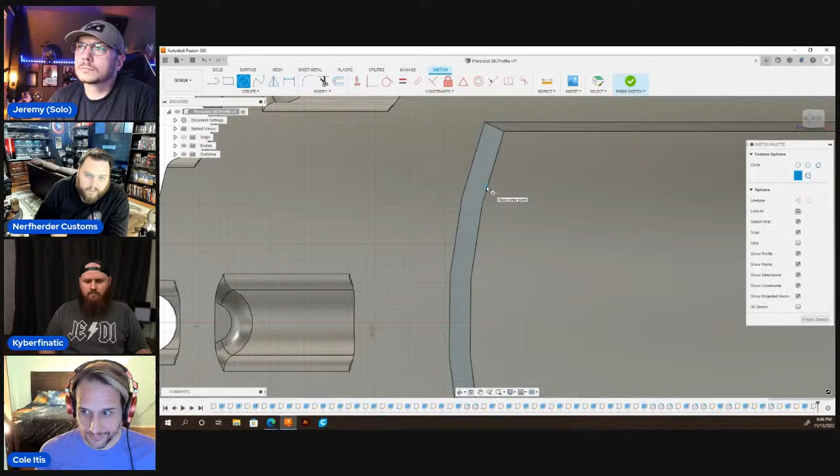So that's why I use that, was it display wire shades or whatever it is? Yeah, that's mainly why I use it, so I can see if it lines up with the other sides or not.

Yeah dude, I love how your component, like to hold the board and all that stuff, is pushed in like its own segmented area. Mine's all still one cylinder, you know? That looks awesome, thanks man. Yeah, how it just kind of rises just for the board. It's not all on the edge, your chassis has more segmented parts instead of just being one straight cylinder. Now I gotta change up my whole fucking game, dude.

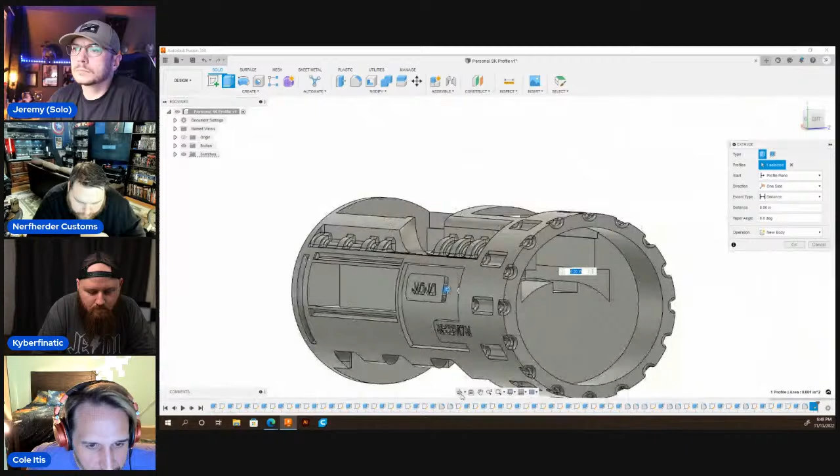The thing you just did was really cool. What's up, what now, when he did that little reverse? Well, I guess not a reverse fillet, but on those pipes on the other side, that was really neat. Yeah, nice.

I like it, it's a quick tool and it gives it a nice look, like up here, takes all the corners out. Those almost look like Graflex T-tracks, looks really neat. Oh yeah, it does look like that.

Yeah, I've done something similar to make knurled pipes, you know, same concept kind of. But you take one of the pipes and just kind of, I think I had it somewhere, that one chassis and that speeder, I did it, but it just makes it look like cogs and knurling, like gnarly, like a gnarly swirly type thing, you know?

See now, why is it not letting me do it on this guy? What's going on here? Hey, I have probably a dumb question, but no such thing, bro.

If I've got a saber that's got pre-drilled accent LEDs, can I just design a chassis that'll hold pixels here instead, so I don't have to use accent LEDs? I don't like accent LEDs, yeah, that's what I do, I usually put the PCBs under. Okay, so just measure it out, you would not do round things, you would do something you could slide a strip into. Well yeah, you can design a holder for a strip that's connected to the chassis.

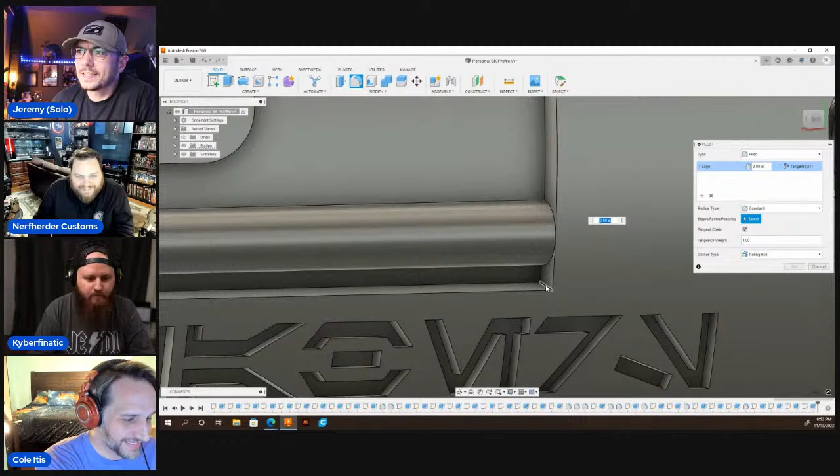I wonder if Facebook's gonna get mad at us. I didn't think about that because I called you a bitch the other day, and it was like, 'Hey, you can't do that to solo sabers.' I was like, damn it, I had to go in and change my response. Facebook sent me a bullying message, and I was like, he's the real bully, I'm just clapping back, man, this ain't fair. It's so funny though with Facebook, 'hey watch your language, sir.' I'm like, dude, all right.

All right, let's see what happens here. I swear to God.

Yeah, okay, I get what's going on here. Son of a bitch, it ain't gonna work. Well... Wow. You gonna be like that, huh? That's how you wanna be? Whatever.

Why won't it let me do that? Okay, let's see.

Do it, Kyle. Bro, Jeremy's got two videos to help you build the basic chassis, and that's just crucial. Watch those, man, I watched them a thousand times probably. And then just play with it, man, that's all it is.

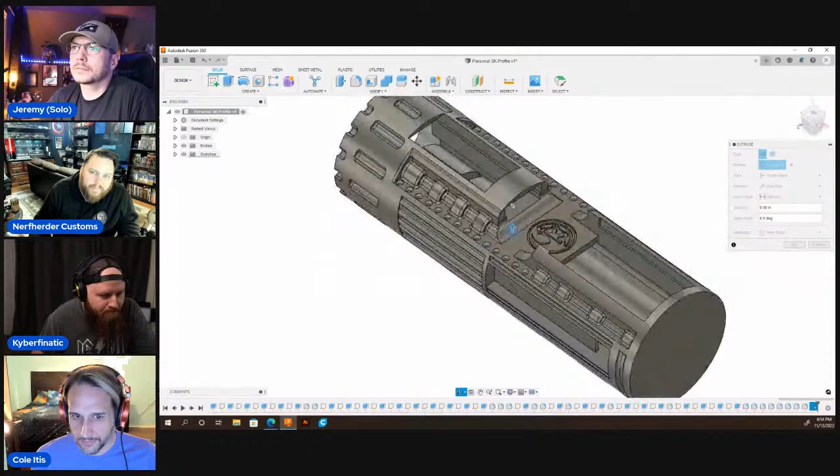I wonder why in the world it won't let me do it on that side. Maybe... let's see, maybe I have to do this. This is kind of dumb.

You thinking about painting yours too? I don't know that I'll paint it, I'm not really good at that. I like using rub and buff though. That's basically what I do, bro. Yeah, I use rub and buff and Sharpies and shit, whatever works. Sharpies, is that what you're doing? Yeah, oh yeah dude. I thought you were hand painting that stuff, man. That's what's up, no man, this is rub and buff, Sharpie, oil paints to give it a wash.

But dude, I only really use a couple colors, you know what I mean, like I'll use red and bronze, like copper or whatever, and it's just highlighting a few pieces. So you could use paint, I've used paint before but I ran out of some paint, and I used a Sharpie once and I was like, that's done dude, we're done here. I use paint pen, it just gets messy, you know what I mean? So I tried to paint mine before, tried it once, I'm like, yeah I'm good, I'm good on painting chassis. Nah man, but if you can do it with marker and stuff, that's cool, I don't mind the rub and buff.

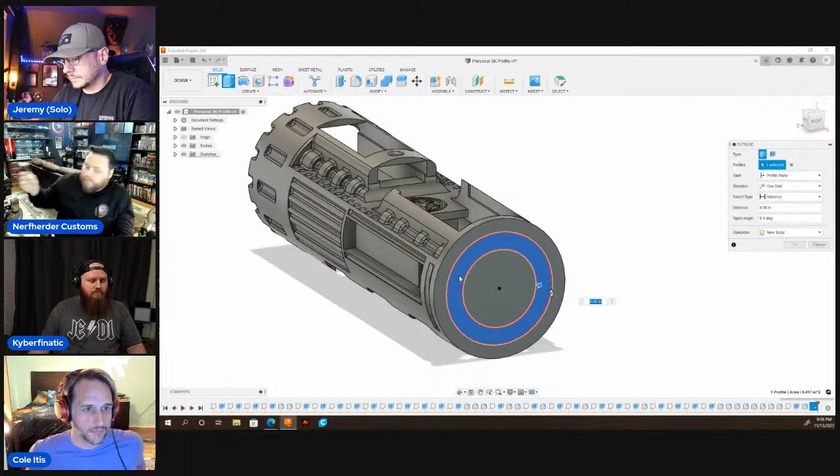Dude, honestly nowadays, literally, I only use rub and buff, Sharpie, like I said, the red and gold or red and bronze. I'll put some green and blue every now and then just because I have a shitload of Sharpies. But I do that, and then I'll do a little bit of my oil, I have a black oil, Artisan, whatever that company is. I'll do that, and do like a wash with water and wipe it off. But really, just sanding your chassis down like crazy, and adding all that, and I'll clear coat it, that's about it. I mean it does take time, there's no doubt about that. I did Cody's in just acrylic, it turned out okay. Yeah, oh yeah, that'll work.

What's that called? Just acrylic paint. Gave it a wash.

And then dry brushed. I do the same technique to Albert's mom every Saturday night. It's a fail-proof technique, it's the only way she'll let me.

Just remember to brush with the grain. Oh my. Dude.

You know one thing I really hate about this is, you go circle pattern, right? Circular pattern, there's two options and I'm always choosing the wrong one. It looks the same when you go in the search pattern. Oh yeah, I know what you're talking about. Which one's different? I don't know what the other one does, but always choose the one on the bottom. Nope, I don't know what that one does either, man. That was wrong for me.

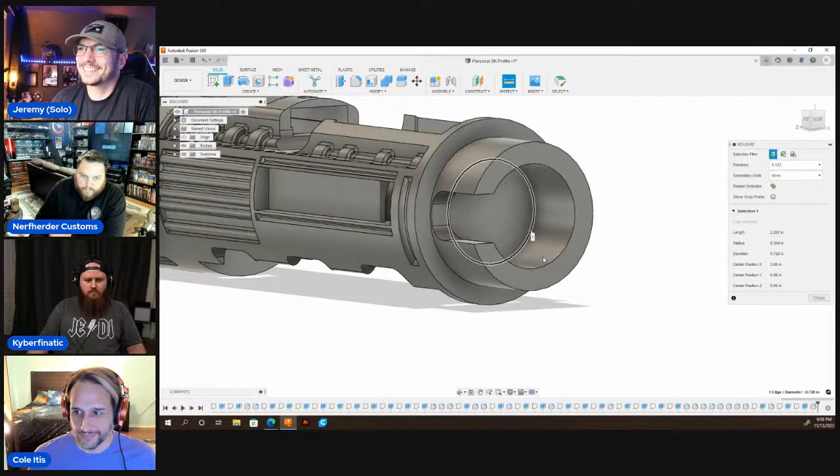728. What was it? 728. Yeah, 48, that's right. Give me that.

All right, let's see.

I feel like I gave that one my all. I'm pretty happy with it. Maybe I'll mess around with it for a while more. Yeah dude, that looks really honestly good. Yeah, it's one of my more favorites that you've done for sure.

All right. Now can I draw on you, you piece of shit?

Let's see what you're doing, bud. Hey, let's see what you're up to. All right, I don't... all right. You guys want to see me struggle? All right, it's up to you.

I would have been going a lot faster, but I ran into this snag. Jesse, you're on mute if you're talking to us. Oh okay, recording something.

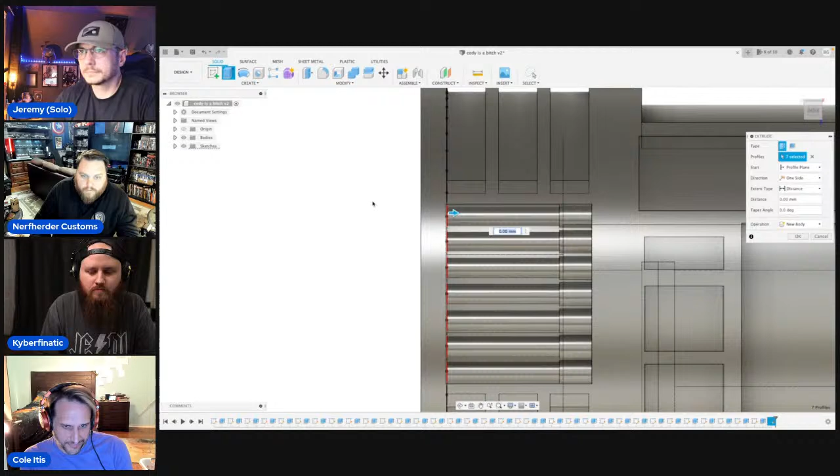Yep, suck it Fusion, I want to talk to the manager. I want to speak to who's in charge. Yeah baby, yeah baby. Was it 2.5? 2.5, yeah, suck my butt dude. I did it.

Whew, that was dumb. So that's basically what I had to do, because this created all the way over to here, every time I tried to draw on this surface it didn't recognize this. So I had to put circles that were identical to that pipe and basically make a new footprint.

Cool dude, one side done. All right, now I'm going to put a fillet on each one of these guys.

You ever use the mirror tool? You could draw on one side and flip it to do the other side when you're done. I haven't tried it on stuff like this. I can try it on the other side because I'm about to try that.

Oh, you bitch. Oh, you bitch. Damn it Jeremy, this is all your fault. My fault? Yeah dude, I want to talk to the Solo Sabers manager, please.

Yeah, I haven't tried it because it's not on a flat plane or a surface. I bet it won't let me because it's a bitch.

Oh, how far back can I go? That'll do. Cool. Oh, crap. What was that? Oh well, that's fine. There we go, there's those little guys.

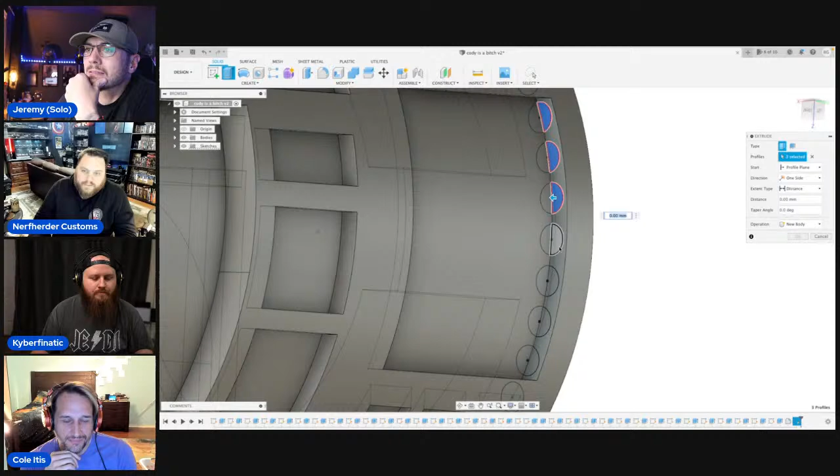I do want the one that's straight though. I do want one of those. Because is that right? Was that right? 48. Here's what I was saying though. You can see, yeah, that's right. See how you can see the other side? Yeah, that's the right gaps. That's the right everything. Okay cool. Now I'm gonna do this guy again.

What's your favorite chassis you have right now? Which one are you talking about, Cody? What's up, Sean? Did you get your business page back?

Oh, you bitch. Oh, you. Kinda. Yeah, that shit sucks, Sean. Sorry to hear that, what exactly happened? He got hacked, and then - he's looking at too much porn, dude, he's looking at too much porn, he got caught. Sorry, I'm kidding, I'm kidding. Yeah, somebody hacked his shit and logged him out or something, right? I don't know. All I know is, yeah, he got hacked and couldn't access his Facebook. Yeah, well, probably true. All right, good. I was just kidding, sorry bro.

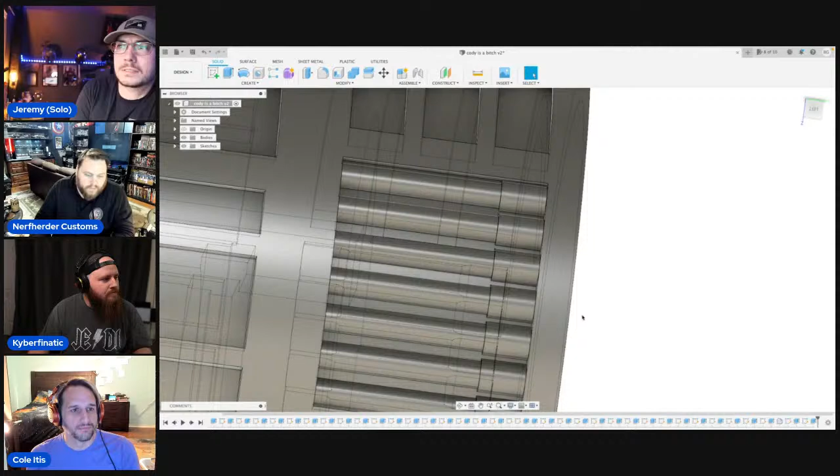Yeah, that sucks though, man. Dude, it made me think about that when that happened. I was like, oh god, I spent so long, so many years just getting to like 1,000 people liking my shit. Me too, I mean, that's the only place - I guess I have Instagram too, but I didn't start Instagram the same time I started my Facebook. It's got all my pictures. I didn't really mess with Instagram that much until recently. Adam used to run that, and he was kind of in and out, just doing it whenever. But then once I was like, all right, I need to learn, I need to post more on Instagram. I started posting more pictures and stuff, but that's taken a long time.

You getting that lop installed, Cody?

They got into the account I used to manage the page. That sucks, because the page was called SP Sabers. I couldn't prove my identity to get back in. Damn.

All right. Hey. On rogue, dudes. What's happening here? Oh, you bitch. Nice. Come on now.

This is usually why I listen to music and shit, because I get so - like I'm just trying to make sure I'm getting everything right. If I talk, I'm just gonna fuck up, I know it. By people who ask me to do tutorials, I'm like, oh, that's a hard thing for me to. To make a tutorial? Yeah, well I mean, I've done it before, but it's just hard for me to work and talk at the same time. That's like even with installing, like when you do the install streams. Yeah, like if I'm installing, I work better when I'm shutting the hell up. If I'm talking some, I go and make mistakes. But I love doing it.

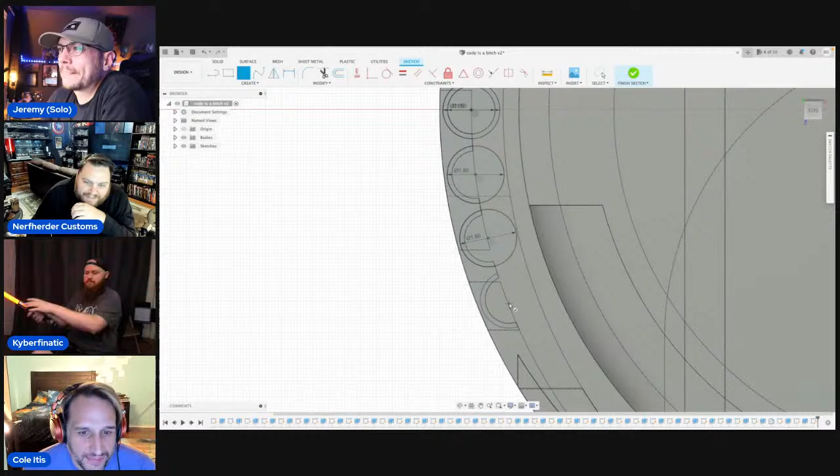We were all hanging out every time anyway, you know what I mean? Like there wasn't really ever going to be a serious sit-down, too much fun was being had in every room. But now I can ask questions and stuff and not sound like a moron. The hardest part is just kind of figuring out how to navigate.

Straight up, learning little keys for shortcuts and things just changes the entire way you do it. Because when I first did this, I was getting so aggravated because I couldn't click on certain things or turn certain things, and I was like, this is just a mess.

So my chassis were super simple, like just extreme bare bones. Dude, you put more work and design into your chassis than I did for months. Mine was so ugly, just battery, board, speaker, done. I didn't even put a channel for you to put your ribbon in if you wanted to for the board, you know?

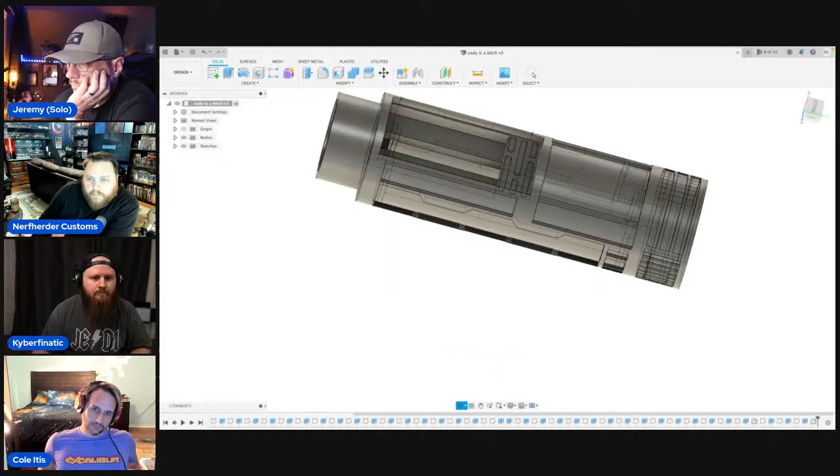And then my greeblies will be pipes and pieces on the inside, so this will give it a lot of that. And then these guys, I'll do a little, whatever that shape is, I'll do some there. But yeah, I kind of want to try to do something a little different up top here. I did this one really cool reactor-type effect once, but it was kind of a bitch.

That's some serious progress. Let's see. Oh yeah, very nice. It just takes time, and that's the best way to do it is to just do one side and then go, all right, let's do that other one. I'm actually going to go ahead and probably do a vent real quick, which is something I enjoy doing. So let's see, this is the middle point.

I just ordered that chassis, I just designed it in MJF. Cost about $40. Damn. From Jaws Tech, Sean. Jeremy, but I had it polished also.

Yeah, what's up? I got something. For me? Yes. What's going on? Or Jesse, is it, you want to share your screen? No, like private chat, I sent you something. Oh, you did? Yep. Anyway.

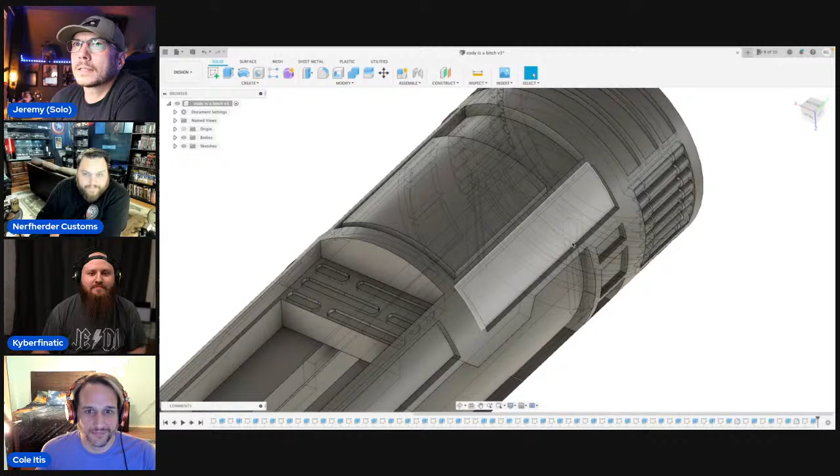I'd have a Saber to put it on, except Benji doesn't like sending my shit back. Oh yeah, what? Oh my God. I'm itching to, I want to know, I don't want to accidentally click it. No, you know what I mean? Like I'm just going to wait till the stream's not live. Play it safe, fellas. Yeah, play it safe.

This is one thing I started doing too, is drawing the line inside the shape that I'm drawing, just so I can get a closer midpoint. So I go there, then I go to like, let's go 8.5 because I went 9.5. Yeah, there you go.

Let's go, hell yeah Sean. Is that the tribute? Is what? Let me send.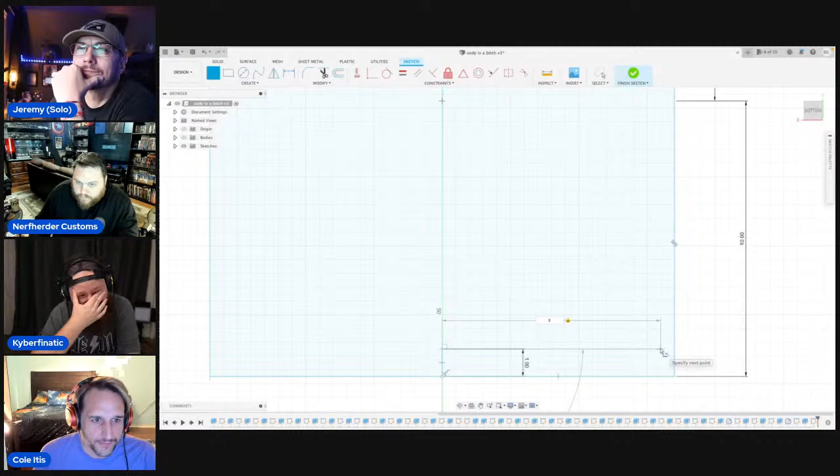But I definitely made it dark side for you. Oh, fuck you, bud. All right, here we go.

Is this gonna be enough? I like want to know. I just want to know so bad.

It's the four sounds that are just the dopest. Yeah.

All right, I wonder how many people are really good at Fusion watching this, just hating everything I'm doing. That fucking moron. Yo, that's sick, man. Thanks. Hell yeah, bro, I gotta put it on a Saber later and play with it, but no, that's what's up.

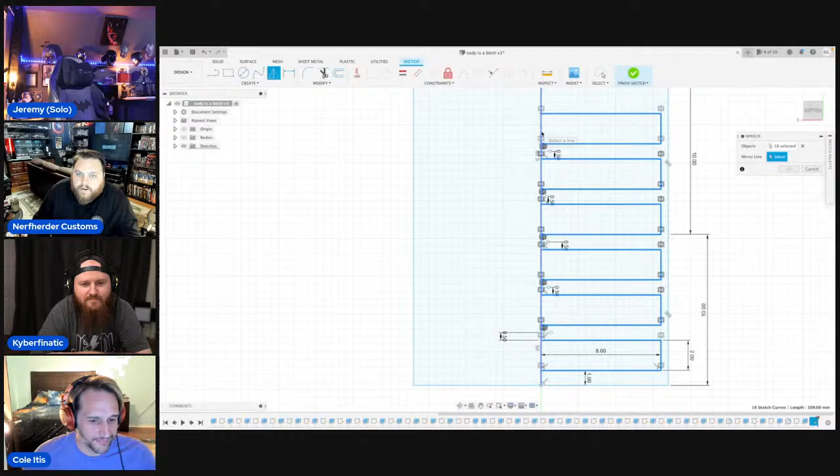I can't believe you guys could all do this, but like can't make a sound font. Shut your mouth, dude, this looks way harder. I'm just saying. I would like to learn how to make sound fonts, it's something I've always thought would be really fun to play with. But I don't want to steal your thunder, Jesse, and get you totally obsolete. Yeah, right, you probably would. Nah, dude.

All right, that looks good. Let's go ahead and punch this. Let's go in. Get to do my first sound font review. Oh my god.

Yo Jeremy, this is what I started doing for my vents, though, that I did on accident, that I actually end up really liking the look of. It makes it look a little more aggressive, so I've kind of only really used it for... well, no, I use it on some things, but it screams Sith in a way. I basically take, instead of... when you take each one of these, you bend them into more oval shapes, to that Star Wars kind of... oh, you bitch.

Yeah, oh you bitch. There we go. I accidentally one time only did it to one side, so I ended up really liking it though. Because then instead of it being like Star Wars panel lights or whatever, it turns them into like sharp vents. Oh, I like that, yeah.

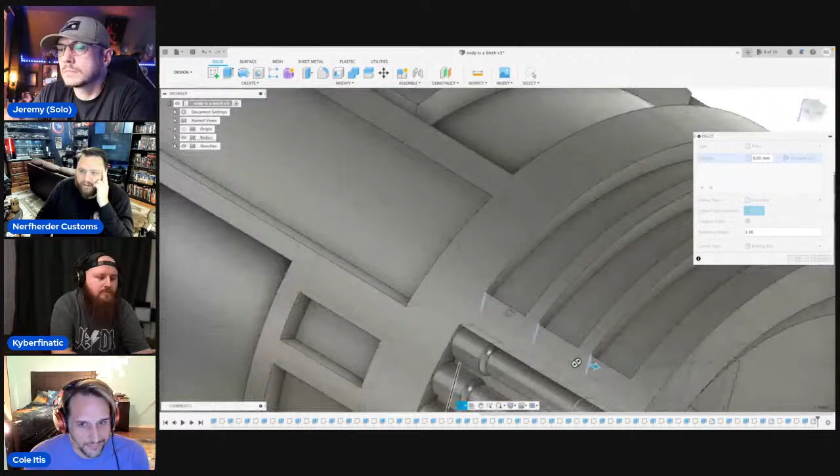That's what I've been doing to all of my vent type greeblies. Simple and effective, dude, simple and effective. But yeah, I started doing that with all of these. It's definitely on, I want to say it's on the scrap, the DV6 scrap run that we got, Jesse. I think I did it on that chassis. I started doing them on pretty much all of them, but it definitely looks good in the Sith hilts that I've done, like the Sith chassis. It kind of feels a little more like First Order Kylo Ren-ish type looking. Does it? But just something a little different. Oh, you bitch.

I got this wing nut in my pocket. It's your cap, dude. I've been building a closet all weekend, wiring up a new lamp or a new light fixture. You giving her neopixels throughout her closet? Just a bunch of strobing accent lights. Put a Proffie board in there. How many Proffie boards power your closet, dude? How many?

I need an installed Saber. I wish I had friends. Damn it, there's so many more I could have added, I'm thinking of now. Dude, do a DLC pack, bro. Yeah, hold on, let me do a DLC real quick. See you, Cody. Later, bitch.

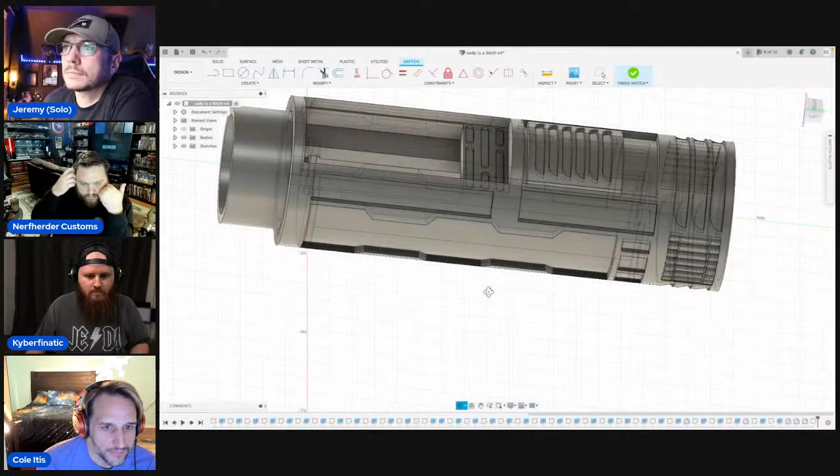I thought about it, you know what I mean? It looks good. No, I just wanted to see how you did it, man. I wasn't looking at it with a judgeful eye. Yeah, you should be like, oh that sucks dude, or oh, you went that way? That's interesting. That's my favorite, when people say it's interesting you went that way.

I thought about spicing it up with the cutouts like you do, but that's kind of your thing. I just felt like if I was going to do something, I don't know what I would do, because what can you do to your battery cradle? I did start, that's why I did them like this though. You leave yourself more room to put all those greeblies in too. That was kind of my answer to that - if I'm not going to cut into this part, I could at least do greeblies around it.

You guys, look how we can see Benji's entire room now. Got some lights. Here it is dude, it's a bunch of shit in here. What is that, a cream cola? Oh dude, vanilla bro. Oh vanilla. Yeah, this is my shit in there, a bunch of fucking shit everywhere. My printers are over there. There's a whole side of the room nobody ever sees.

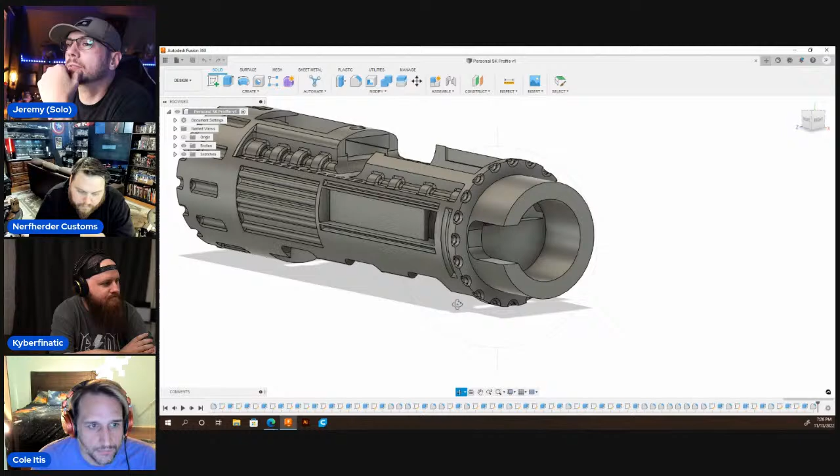I left the cutout here because I think I am going to try to drill out that piece on the rib section of this SK a little bit and kind of inset that kill switch. If I do it this way, then I don't have to keep trying to guess what the height is. It wasn't bad dude, because you can literally guess the height - I measured out the switch top and went off the rib height, because that's what the top of your kill switch should be flush with that rib anyways. So you just kind of got to gauge that, but it wasn't that bad, man.

Can you use like a latching switch as a kill key? Should be able to, yeah. Yeah, I think so, actually right, as long as it's rated, amp rated correctly. Okay.

I'm actually probably going to show you, one time I figured out how to put a fillet on a circle. I was like, holy shit, I didn't know I could do that. The thing that sucks though is if they're not big, then you kind of lose that detail anyways. But I was like, that's pretty dope that you can do that. Once I accidentally did something with the fillet tool, I started trying to see what everything does with it, just experimenting real quick. Does the circle make like a dome? Yeah, it'll make like a rolling ball look.

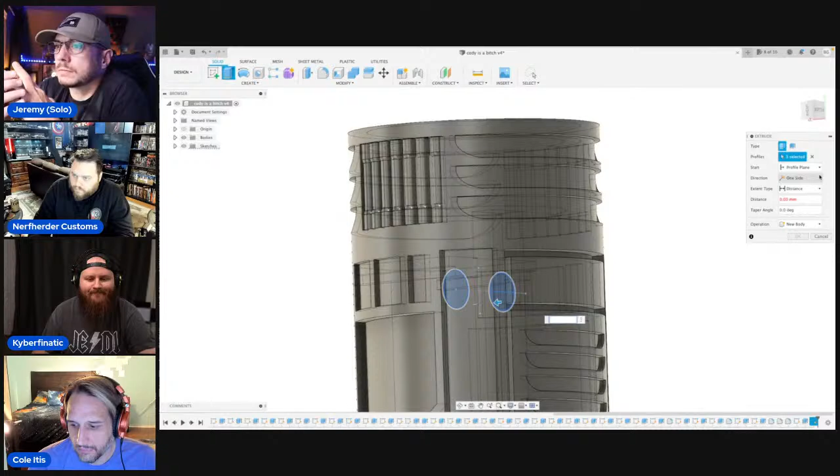This is the part that sucks though - once you do that, you're on two different planes, so you kind of have to guess. Now you could do this again, for people wondering, you could do another one like that, which is ideal because then you got the middle of that circle. It don't matter that much, but the thing is I can't do both of these, I have to do one and then the other. So if you do some greeblies like that, it sucks because you have to literally do this process over and over again.

Hang on DJ, I'm sending it to you.

It's not too bad usually. Okay, so yeah Cole, you can do the whole ball or you can do the corner. So I like to just experiment. Let's see what that looks like.

A little ass nipple right there at the top. So you can do it like that, which is okay. But I also sometimes like to leave it. So let's just do the side now and see what that does. That's better, I like that more.

And then I will also do, you can also do this. I've made holders for switches. You did that there and then hit this. You're making a kind of recessed switch. Oh okay, yeah, so now that whole area is easy to press.

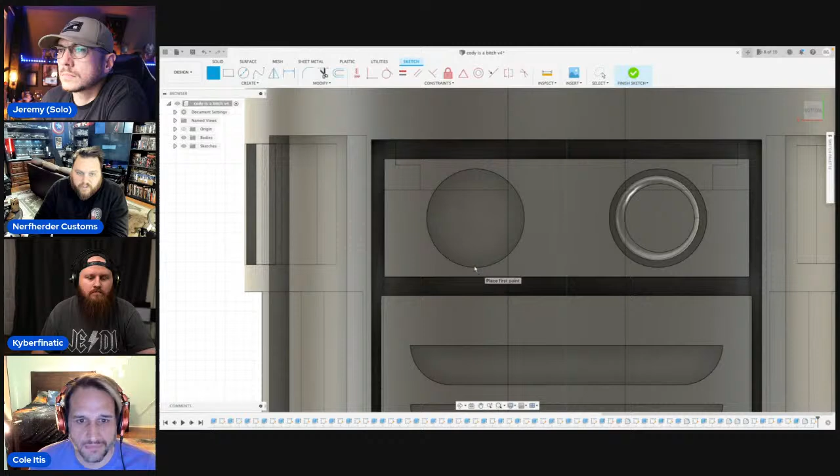Yeah, I pretty much, well that's another thing I started doing, and I won't do until way later. I started doing - oh crap, how big was this? I think it was like 5, right? Nope. That's probably right. I started doing, let's do 4.5, let's see what that looks like. Nope, it's 4. Started putting fillets on each section that I do cutouts of. That was kind of new for me.

Why does this look like a face? Look at him, he's seen some shit - happy chassis face, he's seen some shit. He looks like a frog.

Yeah, I did one chassis and it straight up looked like a robot in a dress. And I was like, all right, well whatever. Oh wait, what did I do here? Why is this one different?

Oh yeah, because it's kind of at an angle. Once you sand it and paint it, it won't look weird.

What's up TJ? What's up dude? Oh what's up TJ, you got room for one more frozen? Hell yeah dude, you designing a chassis? Oh he's here, what up dude, this guy, oh there he is. Are you unfroze? Nope, then he froze again.

But yeah Cole, what I started doing was I started putting a fillet on all these sections. So I'll do it here for sure, which is one that I really like doing. Ooh, that is neat. So when you do it like this, I don't want to lose that sharpness of the vent, so I'll just go right there.

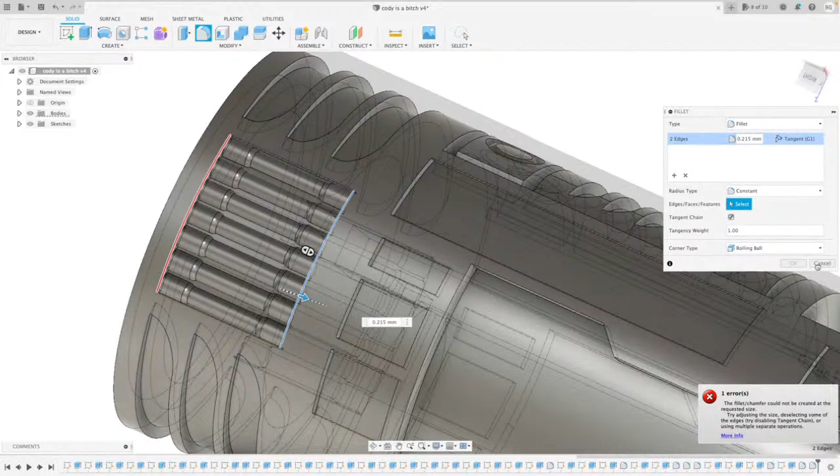It just - oh Lord, we pissed her off. There we go, maybe this guy will be better. So that side, and that side. Yeah see, do something like that. That way it just makes it look a little bit more refined.

And then once you do it to all of them, you know what I mean? That's probably the very last thing I do on chassis - I go around and see what I can make look a little bit cleaner in certain areas. Definitely this guy, so that one, that one. Nice, nice, see? Boom, boom, boom. Those vents look really nice.

Yeah dude, it was an accident man, and I just ended up liking it. So TJ's frozen again - don't freeze dude. Freezing ass, boo, look at this guy.

Is that a temple guard, right? Temple guard from, dude, arms on fire. That's sick. Does it come with the part that folds there too, or is it just a staff? This one is a static staff. Can you guys hear me?

Yep, yeah we can hear you. Yeah we can hear you now. I think you're frozen though. Frozen again, oh damn, he's on that McDonald's WiFi. Yeah, McDonald's WiFi boy, get it. McDonald's WiFi actually ain't that bad. Taco Bell WiFi, there we go. I'll be honest with Taco Bell WiFi.

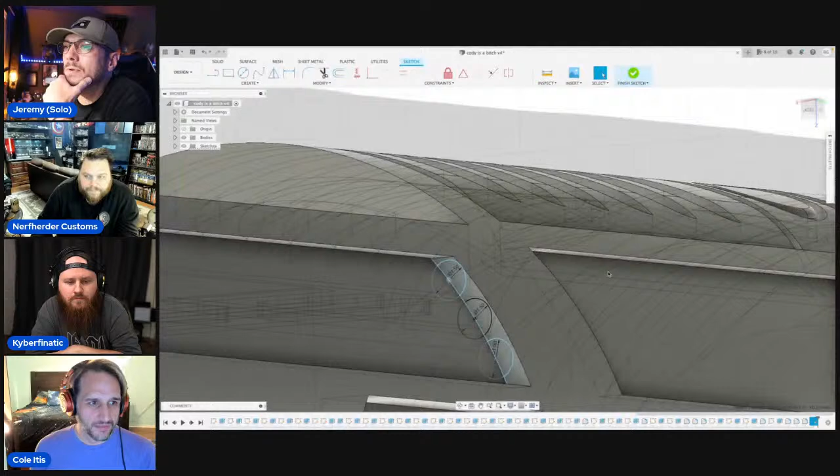What do they serve? They just came up with a whole menu of new stuff. I like the old stuff. Yeah dude, they still have some though, because that cold cut combo, I didn't see it, and I was like give me the cold cut, and then there's a side menu, man. Oh, you can still order the old stuff, it's a secret menu, dude.

Let's go with that. TJ was like, 'Well, I had enough of you guys.' Pretty much. He said, hey, y'all hanging out? Because I'm not.

Yeah, Cole, you should try playing with adding to it. I know the Vader's Vault chassis are good, yeah, I need to definitely find a big boy to install it. I'll be your big boy, dude. You want one? I mean, you've got to have a Graflex, right? Yeah, I'll do that. That wouldn't be bad for you.

Or any TCSS, dude. Any MHS parts are so good to work with because there's so much room. Oh yeah, I have an MHS speeder bike one I want to do. That'll give you plenty of room to play with.

Did you order your Inquisitor Saber, Jesse? Yeah, the Phoenix Props one. I ordered that the day it came out.

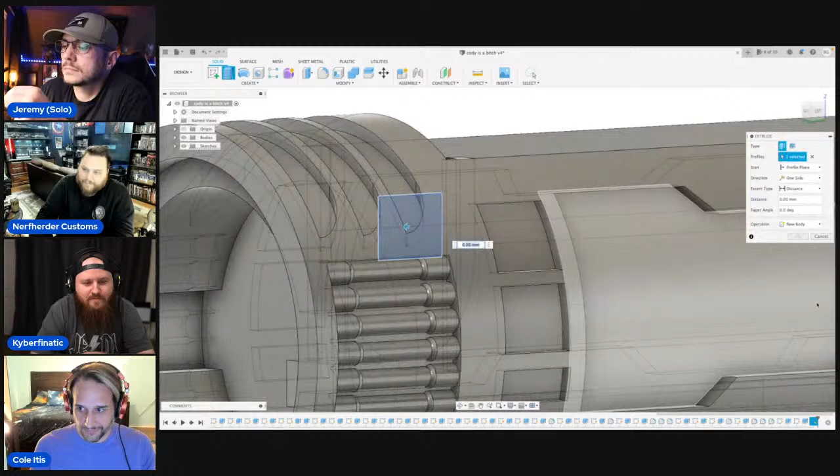Creepy Uncle was my favorite look. Creepy Uncle is mine for sure, probably. Nah, the V2, I mean the B2 I'm talking about is good, the hero. But then again, I haven't really messed with that many other heroes. Like I know the KR one's supposed to be really good. I've never held it.

The Eco one, no, I mean whatever one they did, his complement, the legit one, yeah. And then didn't you have the Phoenix Props one or the Velocity? I had it, but it's small. That's why I want to.

Cole's got it right now. Oh, does he? Oh that's right. You're doing it for Carter, right? For Carter, yep, someday. It's a smaller scale because that was before they found out that they were actually supposed to be bigger.

Carter driving home right now. No, he's been home. And Carter's is the first version, I think, of that, not the one they came out with later called the Ultimate Hero, which is slightly different.

Which blew my mind, I ordered like 3 chassis. Yeah, I thought it was the same thing because mine was from Corbinth, and that was my first CFX Saber. You talking about Corbin? Corbinth, yeah, that was my first CFX Saber. So I've had that one for a minute, and it's good, I like it. Sucks with a big blade, but I had like a 20-inch or an 18-inch blade in it, and it was awesome.

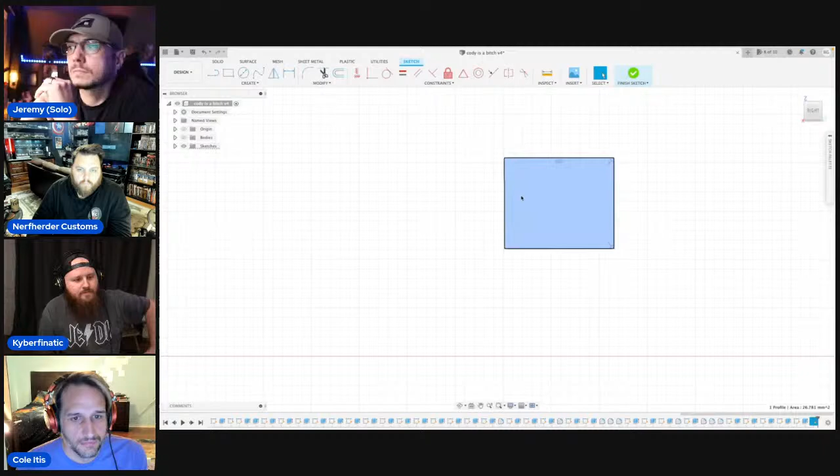Supposedly Dave Parkin, the same guy that just did the static version of this, he's making a hero version - 100%, that's what I'm gonna get. And Airstone already has dibs on it. He wants to do mine because he did this one for me, so he wants to do the hero. I was like, all right.

Your V2? Yeah, if you're gonna get a V2 done, that's my dude, he does really good work. Airstone's is insane, really good stuff. You and him would get along - I mean obviously you get along, but that whole accuracy thing, you guys are actually junkies.

Yeah, the fact that he got vintage fishing wire for it, dude. He'll get vintage paint too, and I'm like, dude, I don't... yeah, I'm pretty sure the tape is too. What is it called, gaff tape? Yeah, I think he got gaffer's tape.

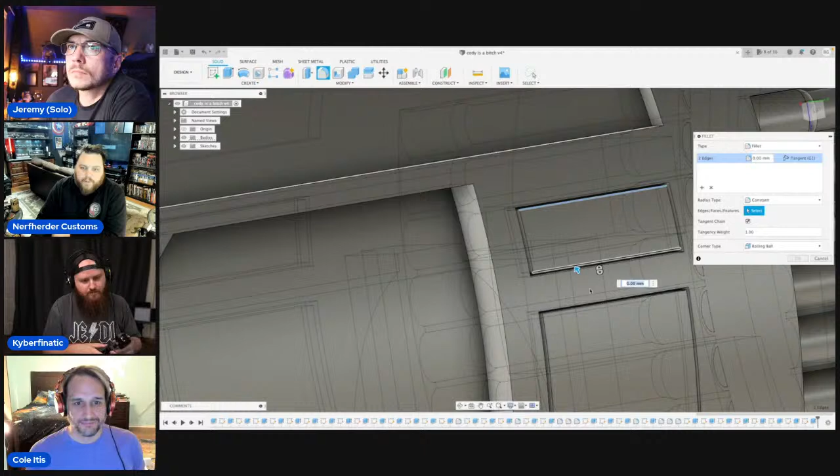This is where I start experimenting with fillets. Cool, I'm like alright, let's see what all of these guys look like if I bend them. Yeah, I've almost been doing this for 3 hours. Really? Yeah, it'll go by man. I think I'm just gonna do a little one, let's just do 0.2.

Yeah dude, I will get lost in this shit, and no joke I could easily spend like 9 hours doing this crap. Yeah, I could see you looking up at 2am and being like 'oops.' Yeah, it's so easy whenever you just sit down and keep playing and keep going - oh, that could look cool. You can get lost in the sauce, dude, no doubt.

Like right here, I think I'm gonna do some slants or whatever. Since this is a Luke and a Graflex, I like to do the X-wing pattern for Red 5, where he's got five slants and then a wing and a dash. That's something I always try to do.

Put something that's character-specific, like with Carter's Vader chassis, dude - I put everything in that entire thing. The control box was his breathing box, his belt was even the wires like the patterns on his stitching on his suit. And then of course the back tank and the speaker pod - that was my favorite, the back tank holder on the end of the speaker.